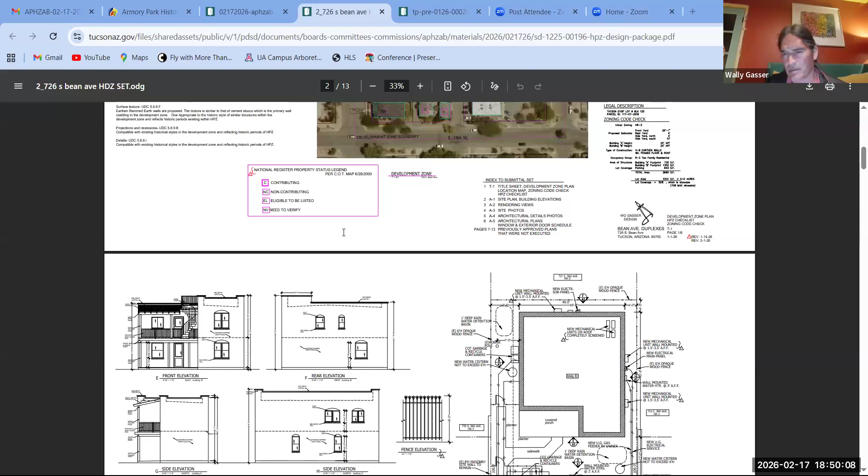Wait, am I able to control this also or no? Okay, no, never mind, that would just be me. I see this little tab. I apologize if I'm not sharing the right sheet. The second sheet, yeah, right there. That's okay. So that is essentially the overlay, the development zone overlay, and on the left margin is the HPZ checklist, and on the right is a code and site code checklist, summarizing coverage essentially and the building parameters.

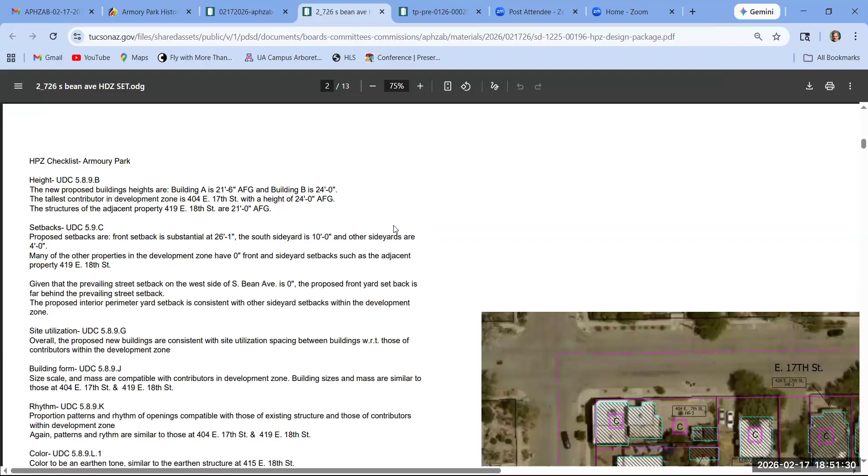So if you go to the checklist on the left margin, to the top— just a quick comment that eligible and non-verified, neither of those are contributing structures, they're too new. Yes, and it doesn't matter for this conversation, but you might want to change that when you adjust your plans. Oh wait, I'm sorry, which?

So if you pull up the image of the development zone, you have the third one down on South Third listed as eligible. It's not, it was built in the 90s. And the bottom one on Third is actually, I think, built in 2009. That one is non-contributing. Okay, what does NV mean?

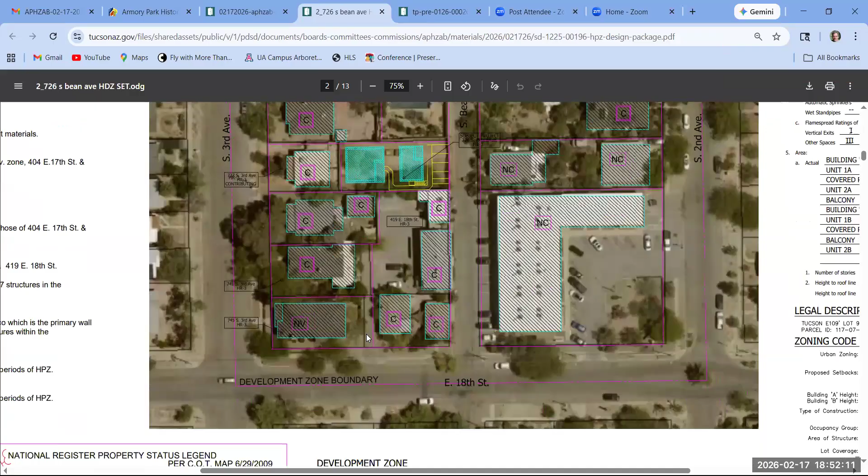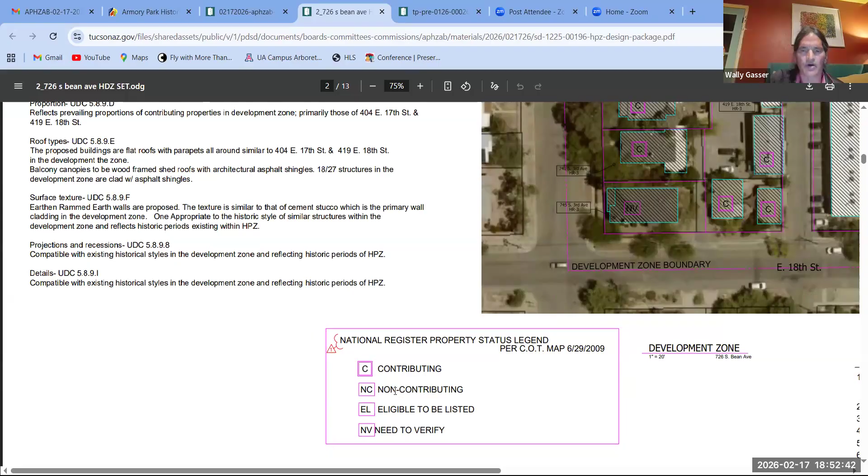Well, it says there's a legend. Your legend says need to verify, but it's non-contributing. Oh okay, I got this from— don't worry about it. Well, okay, so I got this information from a contributing map of the neighborhood. So you're saying there's an updated map. I'm just saying I know those two buildings and they're new. So if it says need to verify, it wasn't. Well, I didn't reference that building. Okay, yeah, sure, fine.

Okay, so as far as the height is concerned, at the top of the list is the height. So there are two contributing properties that justify the heights that we're using. They're 2-story.

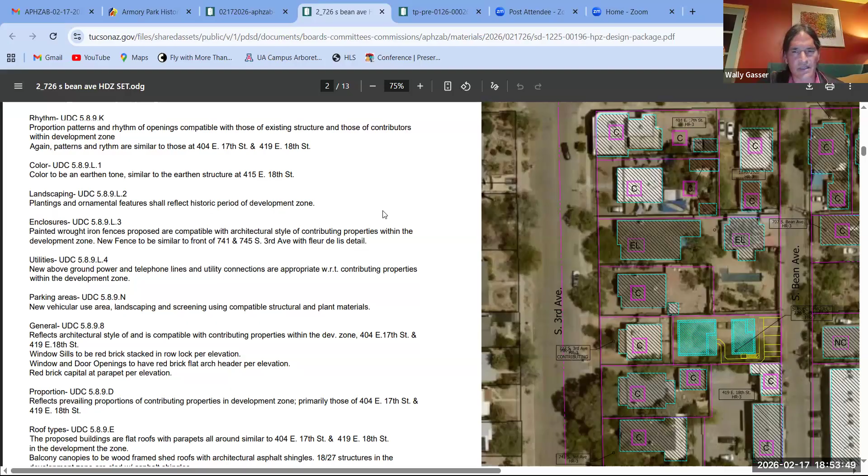So I guess we'll just go down the list as far as parameters go. I saw a comment earlier that we would be encroaching on the allowable setback, because we're asking for a 4 foot setback, but I'm a little unclear what the allowable setback is under the new middle housing code. Is that what's typically applicable here? Five feet? Okay, is it five feet, not four feet? But I thought it was four feet. So okay, we would like to request that.

But if you can show the standard setback is 6 feet or 2/3 height, yes. But if you can show that there are other buildings that have less setback, you can ask that the board waive those.

Well, that certainly is the case in this development zone. But we would be using the middle housing code, which doesn't take into consideration the vertical part of the old setbacks, I guess you'd call it. Is that correct? It still has to be compatible with the site utilization for the HPZ zone. Right, okay, but it's a factor we have to consider. There certainly are contributing properties that have setbacks less than — well, some are 0 — so there are setbacks less than the 5 foot standard.

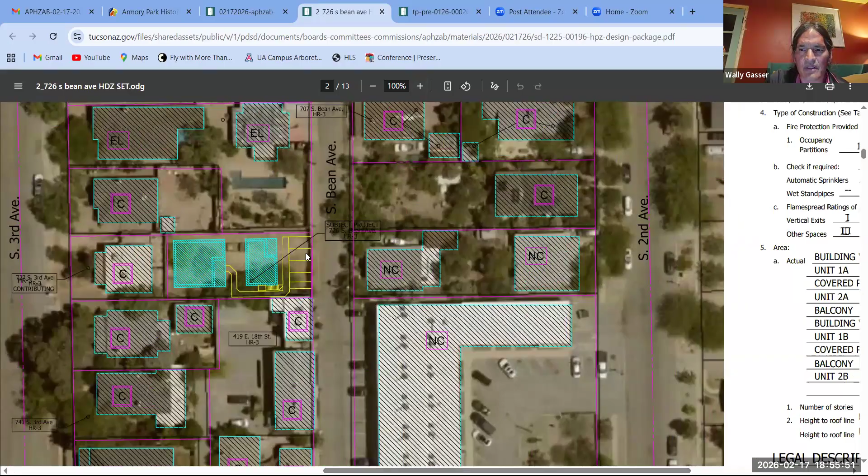So we're proposing a vehicular parking area in the front, one parking space per unit, and that actually provides a decent front setback on the site.

If we can go back to the list. The primary architectural details are compatible with certain contributing properties that are called out in the HPZ checklist, such as flat arches, brick sills at the windows, or excuse me, red brick sills and red brick flat arch.

I specified wood windows and doors. There is a red brick capital at the top of the walls, at the top of the parapets, that are compatible with the property to the south.

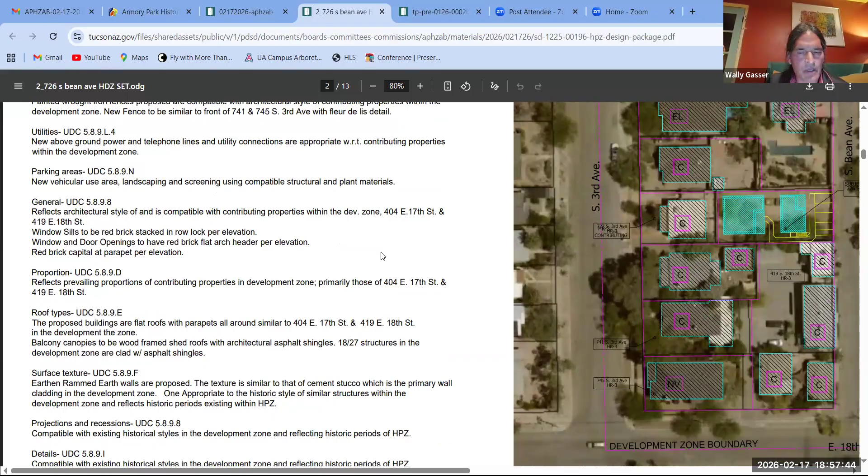Maybe we can go to the next sheet, the elevations. So these elevations are very much compatible with the property to the south, which is a contributing property. And then there's a two-story red brick building at the northeast side of the development zone, or the northeast corner, or northwest corner.

You think that those are your photos? Okay, yeah. Floor plans are farther down. I was looking for — I think those are the photos you're referencing for features within the development zone. Correct, yeah.

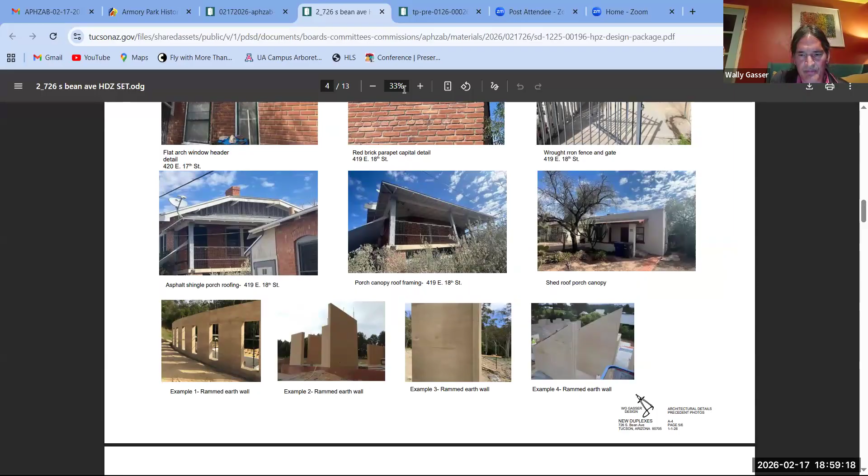And I guess one of — as far as building materials goes — we're proposing rammed earth, which I provided. If you go down one sheet — go up one sheet — yeah, right there. So at the bottom of the sheet I provide pictures of rammed earth, and I would argue that in a lot of ways rammed earth is almost indistinguishable from stucco, especially if it's done really monolithically, or in a smooth fashion.

But I think we may want to take into consideration also that, while there aren't many examples of rammed earth even in an expanded development zone, it's sustainable, and in general I think you could say it's almost indistinguishable from stucco. I don't know how you feel about that.

I think that will be up for discussion, but doing a good job of reviewing the plans, and the plans have been available to the board members, so there probably has been an opportunity to look at the plans.

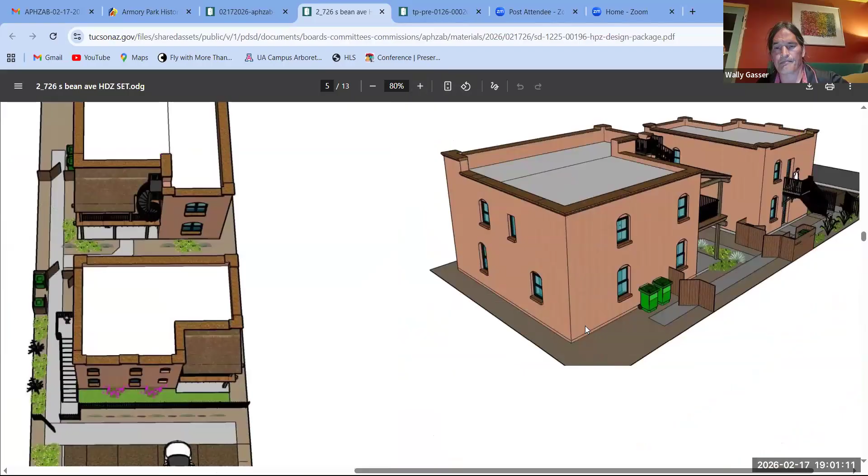And even thoughtfully to show the garbage enclosures. We may want to open it up to questions.

I'm curious, these plans down here, how do they relate? Oh, those are the previously approved plans. Okay, that's what I thought. They're labeled as such on the lower right, the header. Which, actually, technically they're not the approved plans. They were the submission plans, and they're what's available online.

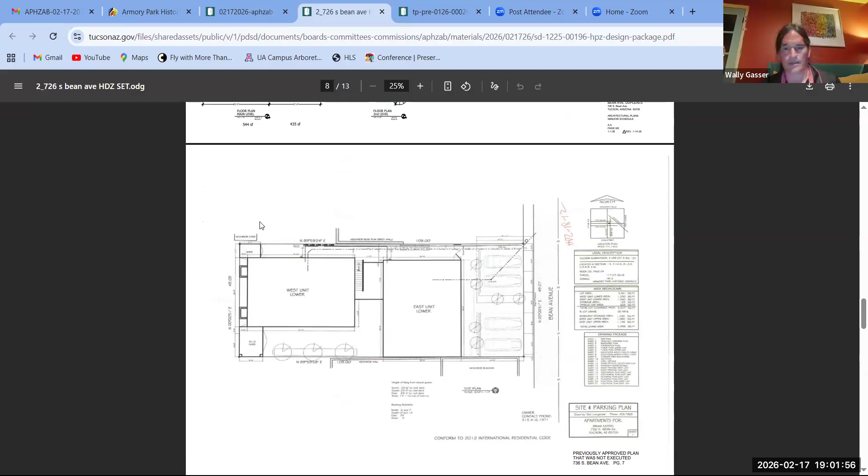But, for instance, the West Building had a required setback from the western property line of 7 feet in the approved plan, and there were no side-to-side slider windows, and no metal doors. So the actual approved plans, which don't show up online, are slightly modified from this. I looked up the old LARs from both Armory Park and Plans Review, and the approval letter from the planning director, so they're close. It does show, for instance, the front parking was approved and a 24-foot building and modified setbacks. But other than that, they're very different projects, except that they're two structures.

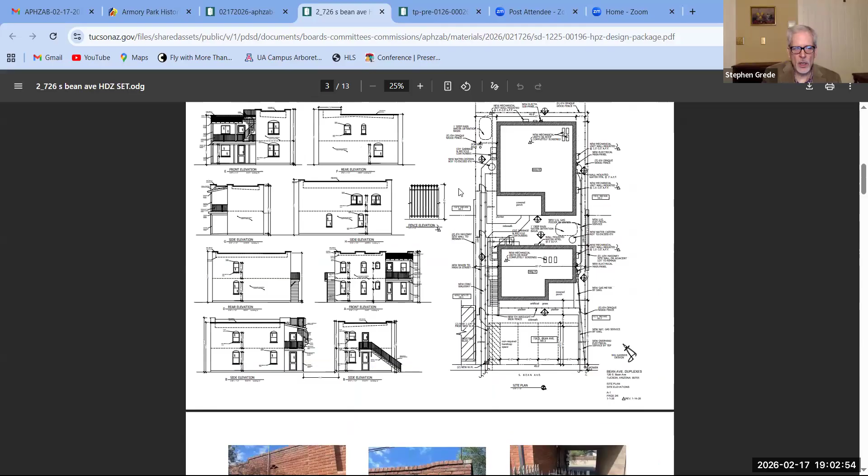So we're addressing this proposal here. Thank you. I'm going to stop sharing for a moment so I can see everybody. So if anybody was to raise their hand, are there questions from board members?

Maurice: Okay, I'll start. First of all, I am pleasantly surprised. After almost 8 years on the board, we have a staff report from the planning and development people, and I think it's very good. I was, again, very pleasantly surprised. It lays out the different issues that we're going against over here. And I appreciate that. I think this is very good.

I wish to see it in future projects. As far as this particular project here, I feel very concerned having to approve a plan which is not the approved plan, which is a previous iteration of that plan. So I don't know how far we want to go into this, since the plan that we're looking at is not actually the plan which was approved.

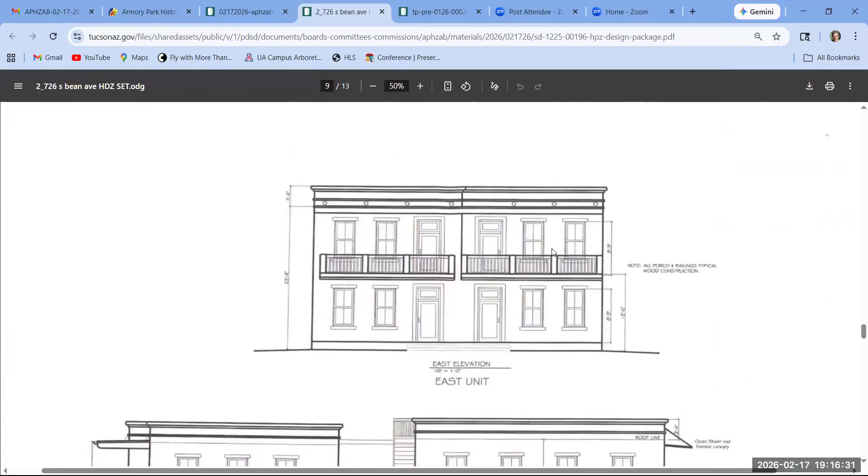I think that's for ease of construction. Well, there's no ease of construction there. I mean, go back down the sheet—Steve, go all the way down to the bottom. Keep going. All right, we're staying right there. So you've got 2/2—wait, but this is—no, no, that's not the project in question.

Sorry, that's the previously proposed project. I understand that, but I'm saying that you indicated to us that those window types were 2/2, and I'm asking you why did you go away from the 2/2? Because I wasn't involved in the previous project.

I think they're prone to malfunction. It has nothing to do with the width, it's just an expression of where that mullion is. Oh, I see, that's all it is. That's a minor issue, I don't know that anybody wants to address that or not.

You've got a 5 foot high wrought iron fence in the front. That should only be about 4 feet. Again, that's not a big item. Why was it 5 feet? For safety, I don't know, I mean, yeah, for safety.

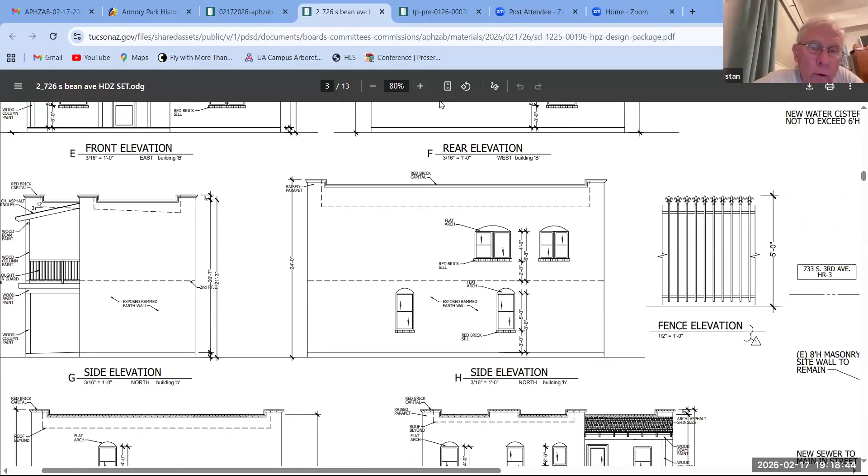On A2, your perspectives and roof plan show a deck going up for the back unit. You're going up on that roof deck, and you have to have a certain height guardrail along the edge, but you don't show that consistently over the entire roof, and you don't show any fence stopping people from going onto the entire roof. So my question is, are you going to have to change the parapet height in order to make your guardrails meet code requirements?

So what are you doing? Are you raising the height of the entire parapet around the entire roof? The parapet, no - there would be a fence in the interior portion of the roof that would basically divide the roof into a court.

You're not showing that for us, so I think that should be indicated. It's really not visible from the adjacent properties, but I can do that. If you're looking at the elevations and you're showing me a parapet, I can see a higher parapet - you would see the fence beyond that. So that means you've got to have a fence that goes along the width of it.

The roof deck would occupy a quarter of that roof area. So if you're looking at that elevation, you've got a short portion on the west side of that building that stops short of where that fence is going to go. So are you going to have to extend that all the way to the other wall that's on the south elevation? No, no, no - the roof deck would occupy a quarter of the roof area.

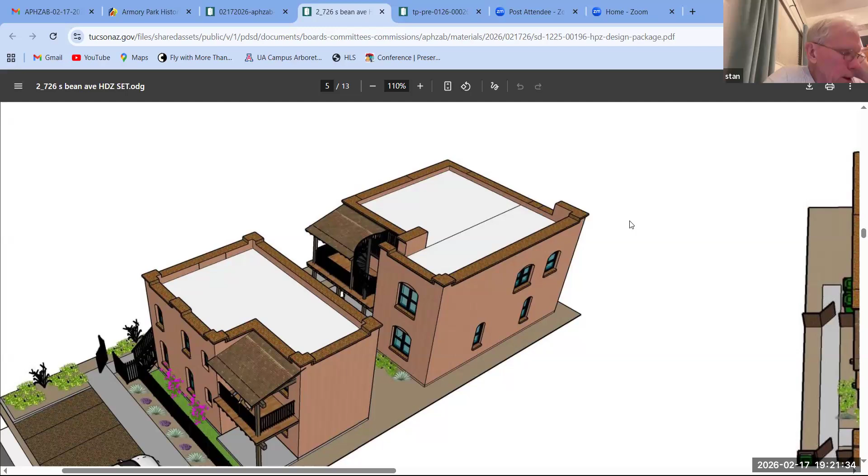So you're going to have a fence there that keeps people from going onto the roof - a rail, yes, correct. You would have something that would come in across here and then across here. And that height would meet the guardrail height for residential construction, which I think is 36 inches. Currently the parapet is like 3'6" above the roof height. All right, so that will be noted on there then.

I don't have any problems with the setbacks. I've already addressed the issue with the parking off the alley. And then there's an existing wood fence along the north property line that's in very poor condition. In fact, you've got things leaning against it to keep it up.

Is that coming down? I haven't really examined it. There's another corrugated metal roof or metal fence behind it. So that could be coordinated with the neighbor.

That wood fence could be removed hypothetically. It needs to be noted on the drawings then, because it's an ugly sight, and I'd rather see it removed because you've got a nice fence otherwise. It's actually the neighbor's fence, and he's got two fences, and the brick wall is the neighbor's too - that's technically on the neighbor's property. It used to be part of a building, I think, and it's just still there. But that is technically on the neighbor's property.

Can you do me a favor? Can you talk to your neighbor and see if they will allow you to take it down? Because with the existing fence, I think visually it would be nice to clean up that entire north elevation. Thank you, that's all I have.

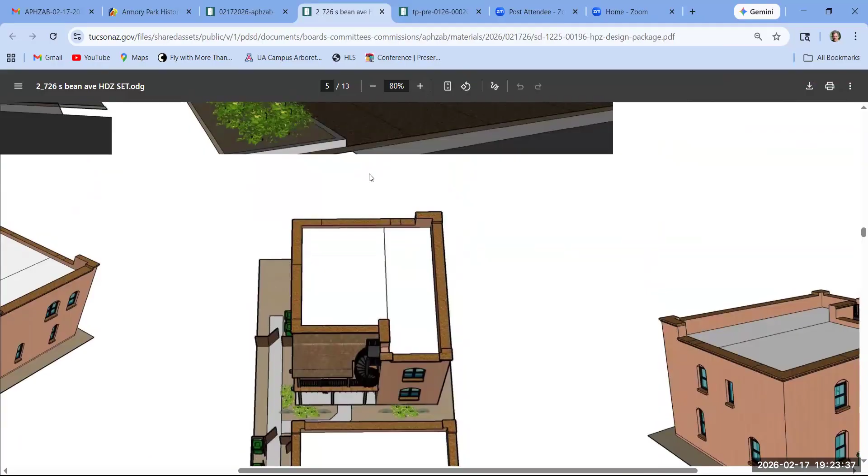I have a couple issues to talk about. One being the setbacks. I have no issues with the setbacks on the north and the south, but I want to talk about the setbacks on the west. I think 4 feet along that western property line is too close, especially for the neighbors, and I'm more or less advocating for those neighbors. In the direct vicinity, there is precedent both with the building directly to the south with the zero lot line and the 2 stories, the apartments farther south. But none of these have that condition with a lot that close and a building that close. At least it's 6 feet with the apartment complex farther down on Bean. So I'd like to see at least 6 feet on that western property line.

I agree, Matt, I just couldn't get my hand to come up. So you're talking about this small piece of this portion? Yeah, that's the west property line. I'd at least like to see that one at 6. I'm fine with the north being 4, and the south at 10 feet is all right too. Okay.

The other item I'd like to talk about is the landscaping requirements. I apologize, this middle housing is new to everybody and new to me, but I just want to run through the bullet items listed for the landscaping because I don't think you're giving yourself enough space for these items. One tree for every 1,000 square feet of gross floor area. Existing trees can count if they're not in the way of the building. You do have some existing trees on site. Maybe they can be worked around. Actually, I don't think so.

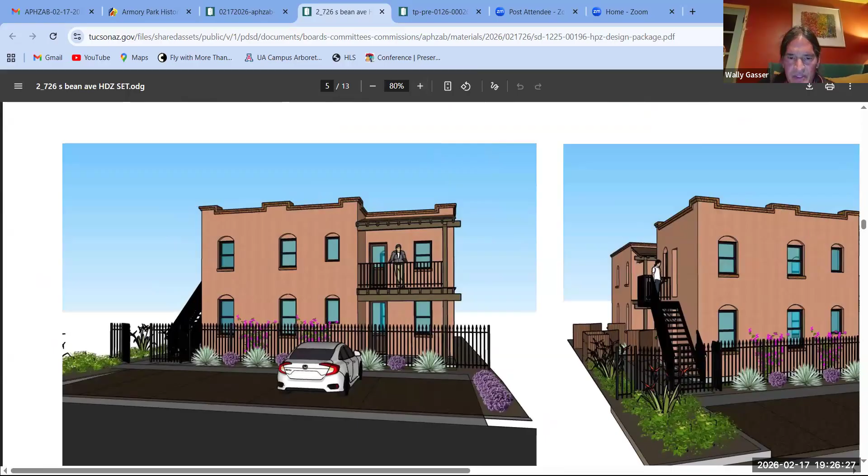I didn't provide a landscape plan, but I kind of fleshed out some landscaping in the rendering. I placed some plants, and there definitely are some areas that can be used for planter areas.

Is it possible to move that building on the west end another 2 feet away from the property line so that they can get to 6 feet? On the west, yes. All right, so we'll make that part of the condition then.

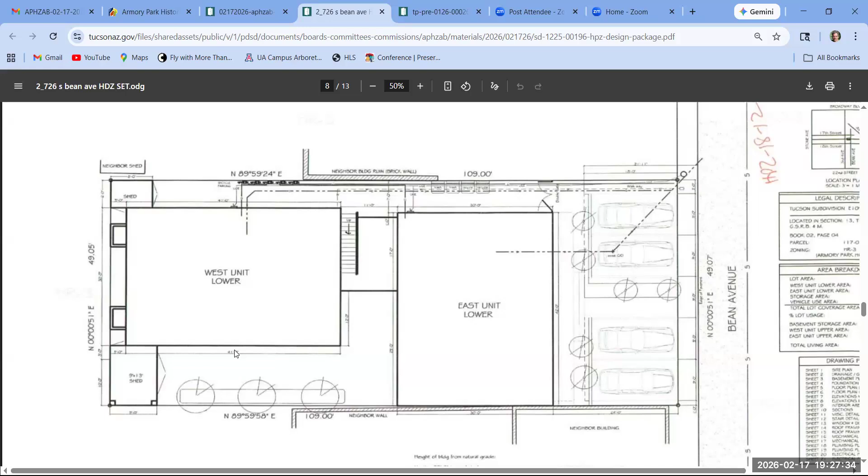I agree, though, that a new 24-foot high wall, 4 feet from a property line, looking down into your yard for the neighbor to the west, is a little bit invasive. So I would advocate for pushing that building into the lot as much as possible. Especially since, Wally, when you were asked, you just went like, oh yeah, that's fine, so it seems like that would be easily done. The 6 foot setback.

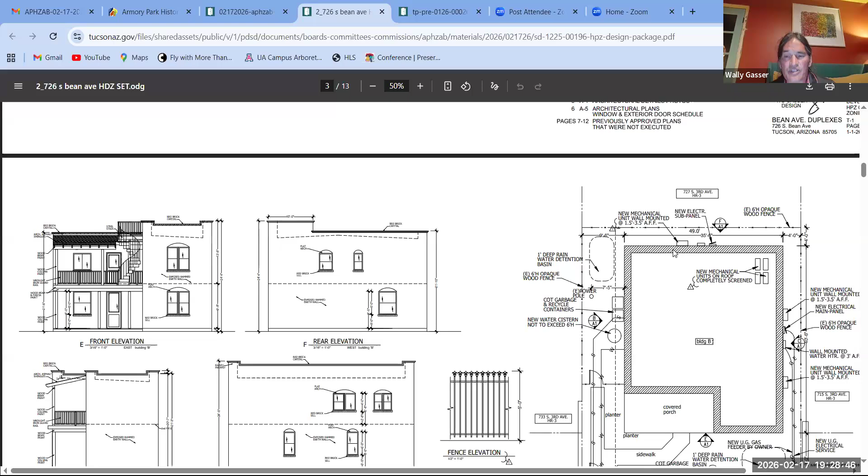6 or 7, or however much you can shrink the yard between your two duplexes to 6 foot would accommodate, and that would be helpful in a revised set of plans. Yeah, 6 foot sounds good to me.

Has the city issued a variance yet? It's not required technically if we approve it as allowable, because of the evident setbacks within the development zone. Okay.

So for instance, I had to print them so I could see them. I was looking at your floor plans and then trying to relate them to your elevations, and they don't line up. So if we can go back to the development package on page... Oh, I know what you're talking about. Yeah, but okay, so there was a revision. There was a floor plan revision, but it doesn't affect the footprint, or the rear unit you're talking about.

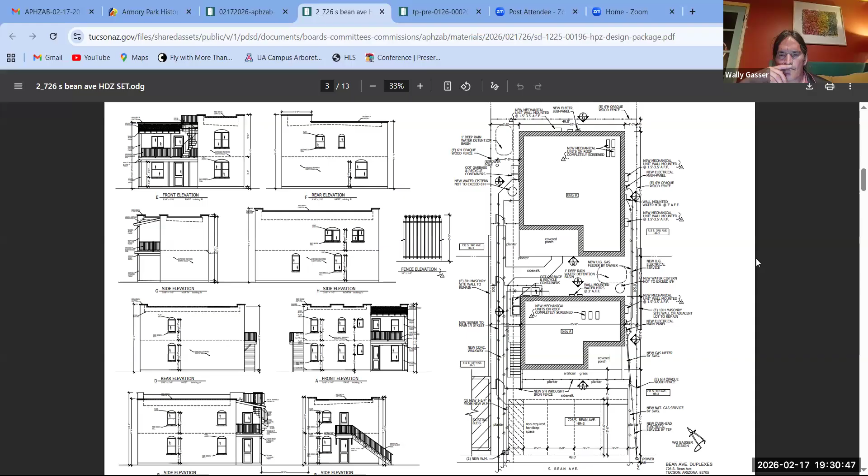So on that one, you're still showing a sliding window or a double casement on the second floor, on the balcony. And that needs to be fixed because sliders are prohibited. Could that be... that's an error.

Yeah, that's an error. And you're also showing on the first floor on your plans that there is a window in your staircase at some unspecified height that's narrow, right up against the wall, which is not in that elevation.

You get the floor plan. Yeah, it's impossible to see them side by side unless you print them out. Okay, and there's problems with every single one of them, except one. No, two of them are okay.

So it's this one here you're talking about. Yeah, there's a little window there. That's 10. Okay, and the numbers on the plans do not align with the window schedules.

They're different. So for instance, while we're looking at this, on the kitchen, dining, living room floor plan of building B, you show a door and two windows, but your floor plan shows two windows in entirely different areas that align with the second story.

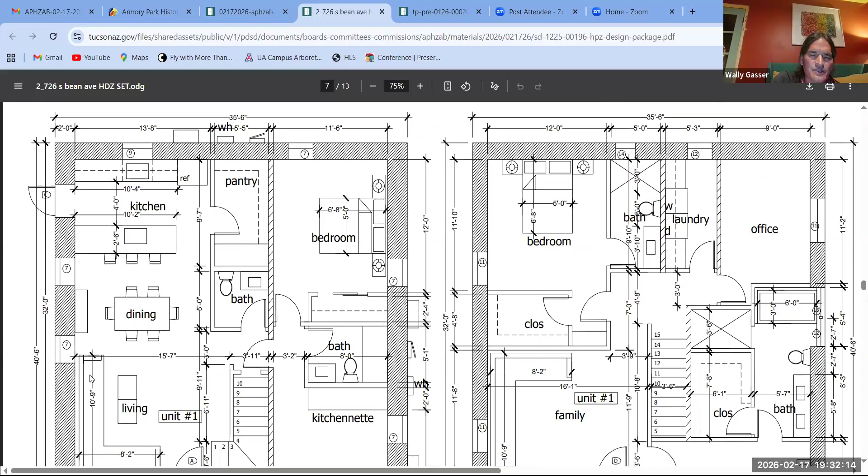Okay, yes, that is there was a revision, like an indeterminate revision. Since these are preliminary plans, it didn't... so we've got to see a set that match. Okay, so on the second elevation at the top, the back actually has two windows on the first floor and two windows on the second floor,

but the kitchen window is shorter than you've got it shown drawn. And then on the elevation that shows the side elevation of building B, which is the next one, there's no windows on any of those walls, and I understand because you've got beds up against them, and they'd have to be clerestory, which we don't like.

But we don't usually approve blank walls anywhere, just as a comment. And then the next one over, it shows a double hung next to a fixed, but we don't use that. They either should be both double hung or both casement. And to Stan's comment,

I remember looking at this development zone. There are double hung, there are single panel or multi-paned, there are casements in the development zone. So, and there are examples of mixed, so you can use those different forms, but if you've got a series of windows, both windows ought to match.

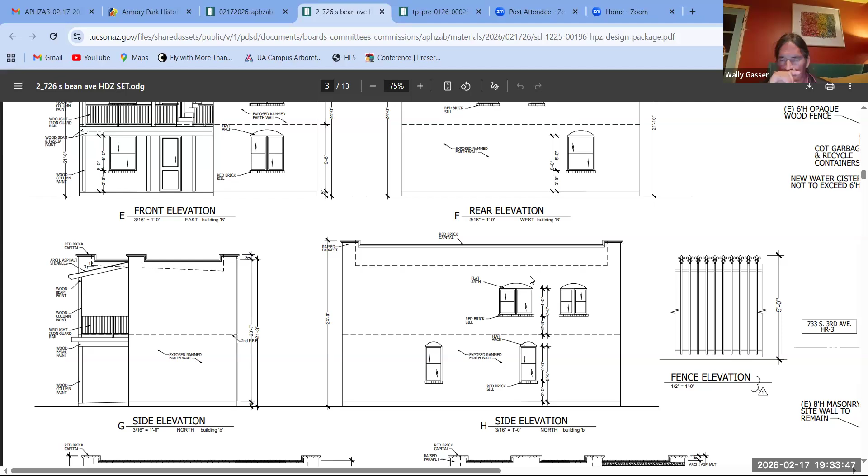Okay, so you might want to do two casements there because one's over the tub and one is openable. But that would mean that the window next to it on the second floor, probably in the bedroom or the office, probably ought to have two casements too, so that you retain a rhythm on your plan.

Yeah, okay. And then the next set of images down, you're not showing the parapets that would stick up.

The back is about right, looks like the two windows. And on the front, your renderings show the same size windows there in the bathrooms, but they're different sizes on the plans. That needs to be adjusted. Then in the bottom, see, they're the same there.

Sorry about all this. And then on the bottom set of drawings, again, sidewall, door and two windows, different locations. The other thing they don't show is...

I would really encourage you not to put integral drains inside rammed earth. You will always have water problems. You would be better off doing scuppers and external downspouts for long-term viability of your building, but those should be shown. I would agree with that, John.

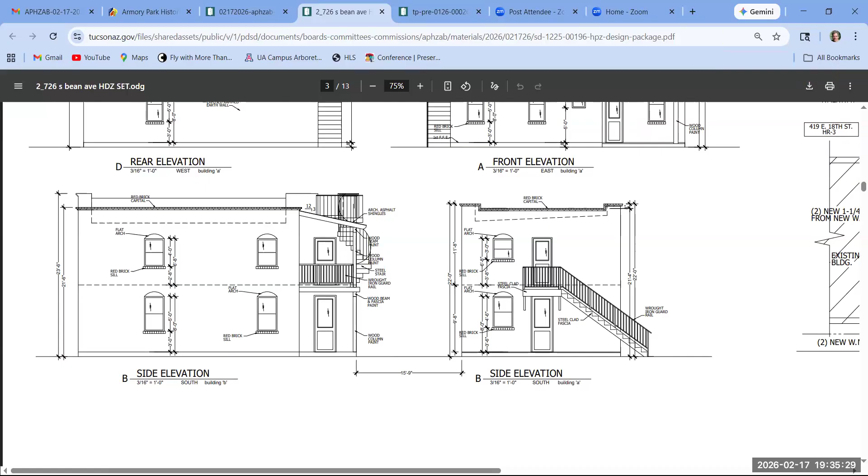So just a comment, and then on the site plan itself, a little over to the right, you've got several different locations for your trash, but I don't think you really want to have the trash cans right underneath your kitchen window that opens. So you might want to look at that.

The power pole you're showing on your plans is not actually where it is on the lot. And that's a weird one because that was supposedly not our purview, but was brought up the last time we looked at this whole project. There's a telephone pole, and 7 years ago it fed 3 houses. Now it looks like it's just feeding your house, and a new pole went up on the property to the south that is now feeding those other homes.

But you do have a sewer right down the middle of the lot that feeds the property to the west that will have to be addressed. And you legally have a 10-foot easement all the way along the south side, and building A conforms, but building B is 6 inches into it currently. I hope that flies. I don't know, that's when you get to the inspectors.

But little tweaks, and then you ought to show how the cisterns catch into your runoff so that you can show what size drainage basins you actually need on site. And I'm really glad Matt brought up the landscaping, that you have to have bushes if you can't do trees and that sort of thing. But it means since we're using that, we should see that on your plans.

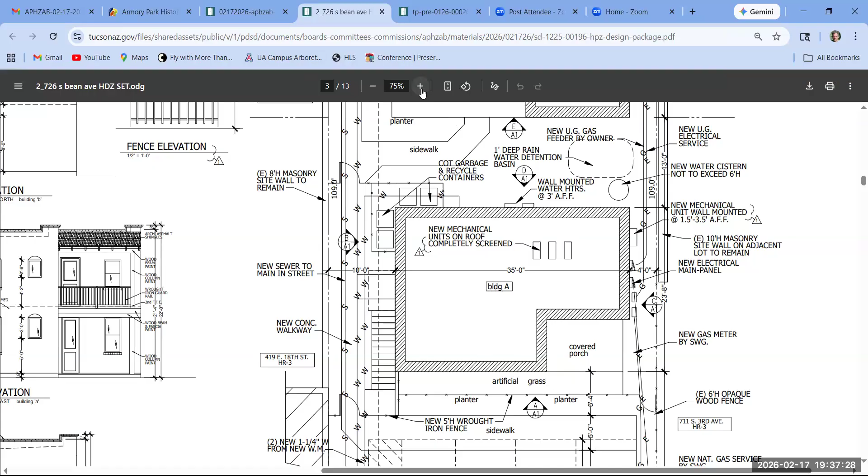And I will say that Steve helped me out here. The Historic Landscape Subcommittee was reviewing artificial turf and found that it's not appropriate generally because it's toxic and it's just not a great thing. So you might look at other treatments there.

I'd be uncomfortable approving that. I'm okay with the parking the way it is, although the access space probably ought to be concrete, has the path in to your front doors, rather than asphalt that's marked.

And the front fence, you've shown it at 5. Technically, it can be 6 feet in front if it's all open, which you may need for security at this property. And you might want to put any other fencing you might want to put up on a plan.

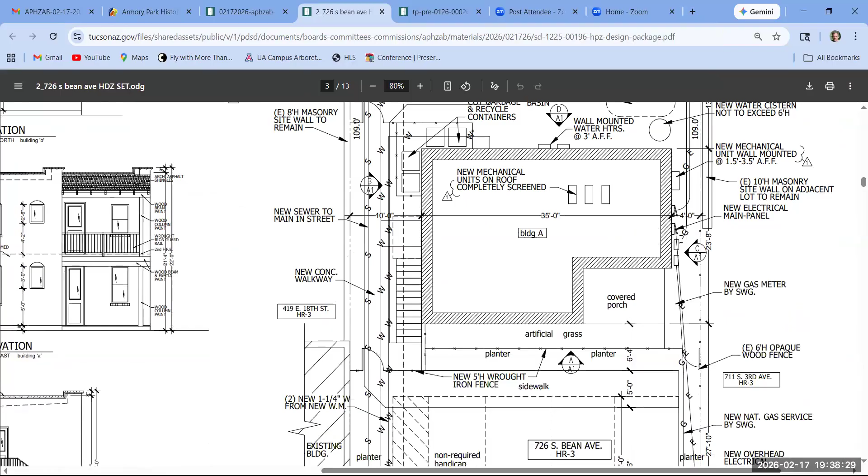We also don't have any light fixtures shown, and would need those. The light fixtures would be in the plan, or any in exterior elevation? Just show us a picture of the type you're doing, to see if they're historically compatible. You may only have one on each porch, and it's just like a globe, I don't know, but we're not seeing any of that.

Like Matt said, I'm okay with a 4-foot on the north because it's up against yards, and I'm okay with the setbacks if they meet the easement on the south. But I encourage you to move your building forward.

On the question of rammed earth, I know that it was talked about when I was only a citizen advisor before. Actually, I don't mind it as a form for infill in Armory Park generally, if it's done properly and the rest of the building form is historically compatible. I have some reservations possibly on a vacant lot with it being a primary residence, but that would be specific to site.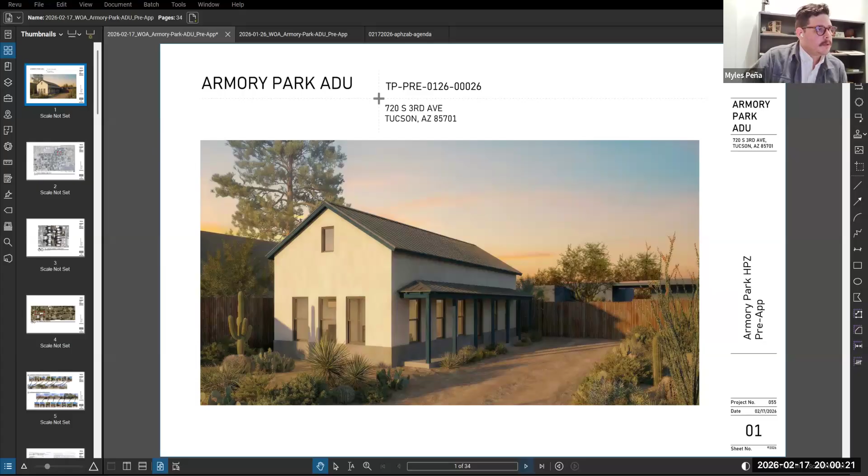Within the development zone, you can see where we are in the southeast portion of the neighborhood. There's a lot of contributing properties along the street here. So here is 720 with access off of Railroad. You can see a little bit old in terms of the status of the property. There has been a lot of work happening, but here is kind of the latest from Pima County.

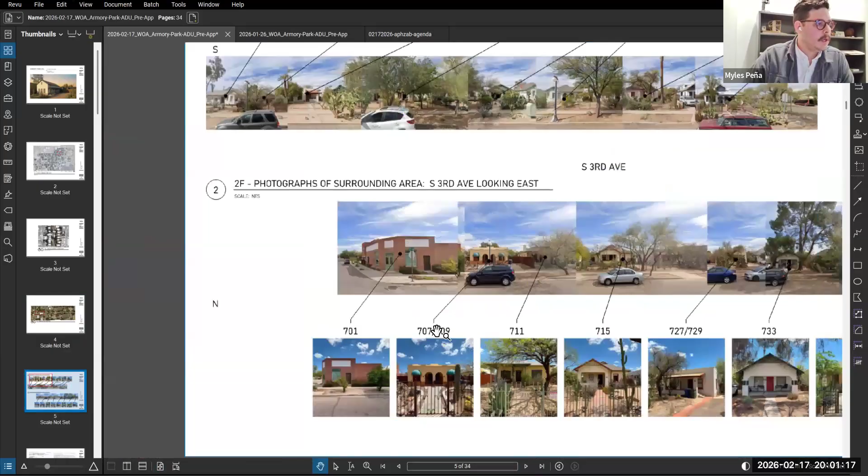And have also spent some time diving into those existing homes within the development zone. Last time I was with you was looking at the garage for Jake here on the corner at 702. The character of the street here is largely gable, hip, mixed roofs, Queen Anne style, with the occasional flat roof structures. The grocery on the corner, which was originally a design inspiration, but that has since shifted.

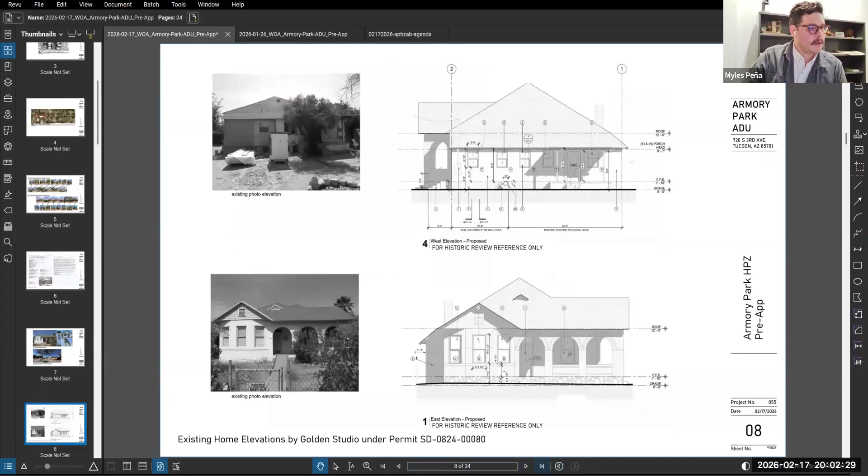Starting to look at the design again, looking at the height - I think the height and the type of structure, the roof form, was a really large component of the previous review comments. So the starting point for this proposal was looking at the gable here on the north side of the home, and the roof form is matching the pitch of this roof. We're trying to keep it around the ridge height of 18'6", but the maximum height of the house is 22'9" on the existing home.

So this was the previous design that was presented in July of 2025, and for multiple reasons there were concerns with this. Looking at the meeting notes from that meeting, the secondary structure shouldn't be taller in height than the main structure, which was not an issue before. But I think considering just the flat roof versus the gable roof structure, there was a stature sort of difference that was occurring.

And there was some discussion about measuring roof heights, and some discussion about using a standing seam metal roof on the porch. That's going to be a main issue I'd like to look at with everybody here today, because we still are proposing a standing seam roof for several reasons.

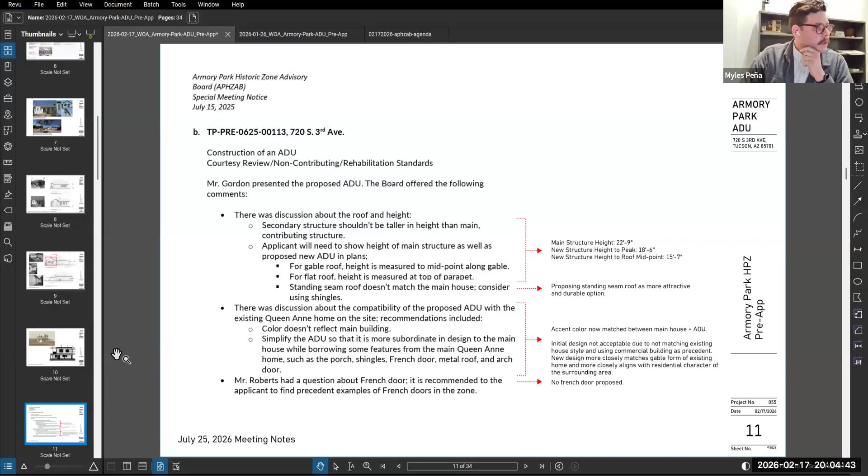The accent color was different from the main house. That's been resolved, and we have a new accent color proposed for both the existing home and the ADU. There were also comments to simplify the ADU so it's more subordinate in design to the main house while borrowing some features from the main Queen Anne home, such as the porch shingles, French door, metal roof, and arch door. I think some of those were negatives, but I feel like we're largely achieving that. There were also issues with the French door in the original design, and we currently have no French doors proposed in this design.

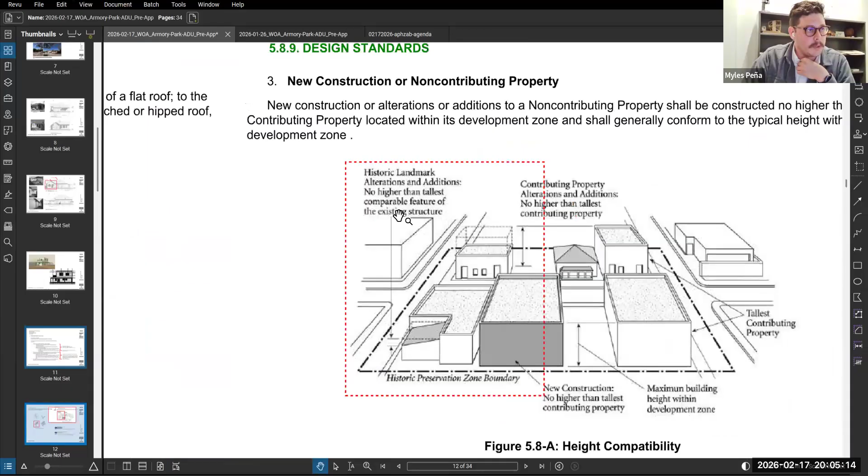There was some back and forth at the last meeting on the height. This is from the UDC design standards 5.8.9. There are other ways of measuring, but they're largely not relevant because the main target here is to have alterations or additions be no higher than the tallest comparable feature of the existing structure, which we are in compliance with.

There was also some discussion on the height of the casitas. Originally, guidance from the City of Tucson in 2022 was 12 feet or the same height as the primary structure, whichever is greater. That was revised and simplified in 2024 to be the max height of a single family dwelling within the same zone, which is generally 25 feet. But again, we are keeping the addition, the detached ADU, shorter than the main house.

I also wanted to highlight some of the guidelines here in terms of keeping additions simple and appropriate in size, shape, material, color, and detail. I believe we're meeting all of those requirements. There are some slight departures, but new construction does not need to copy the existing structure and should be compatible with surrounding historic buildings and streetscapes. So we've paid very close attention to make sure we're meeting those requirements in terms of fitting in with the surrounding neighborhood, keeping the changes from the street side visible to a minimum, and keeping all of the materials appropriate to the building and the neighborhood.

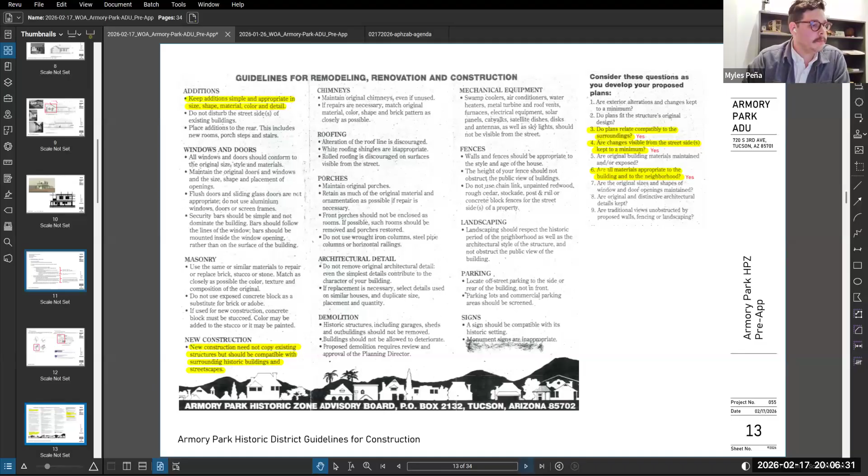This is the official form, but that's largely just reiterating what we've discussed.

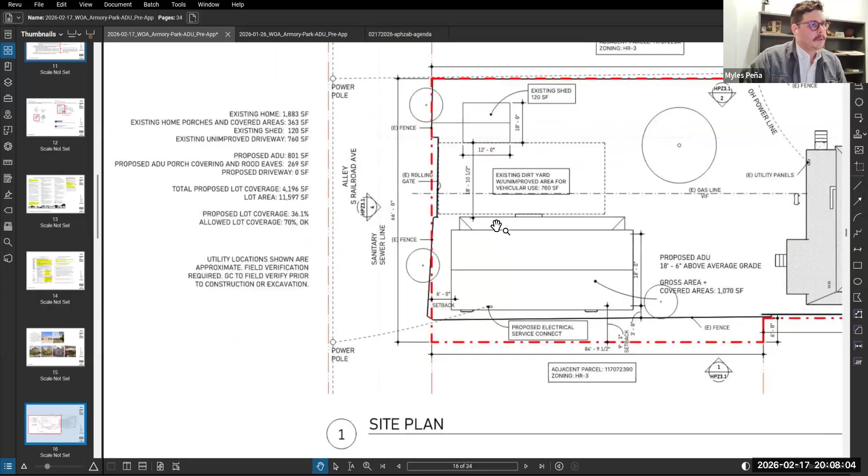Looking at the site, we have South 3rd on the east side of the site, with the main house here. There's a little bit of a dogleg in the property line, so we are maintaining a 9-foot setback from the south side and a 6-foot setback on the west side. All of the fence and gate are existing here. No issues in terms of lot coverage, including the parking area off of South Railroad and any porches and coverings. We're at 36% lot coverage; we're allowed 70.

In terms of utilities, we are planning at the moment to tap off of the power pole in the alley here to have a separate meter. You'll see more elevations with utilities, but basically the main strategy is to conceal and hide all of the utilities. So condensers, water heater, the electrical connection, venting for dryer, everything is geared towards this south facade here by the existing fence.

Because the overall massing, shape, and size of that previous structure was a concern, the starting point for this design was looking at what the overall massing felt like. I spent some time on site sketching, taking stock of the surrounding buildings, trees, landscape, and things like that. The scale was starting to feel very comfortable in terms of tucking into and nestling into the neighborhood here.

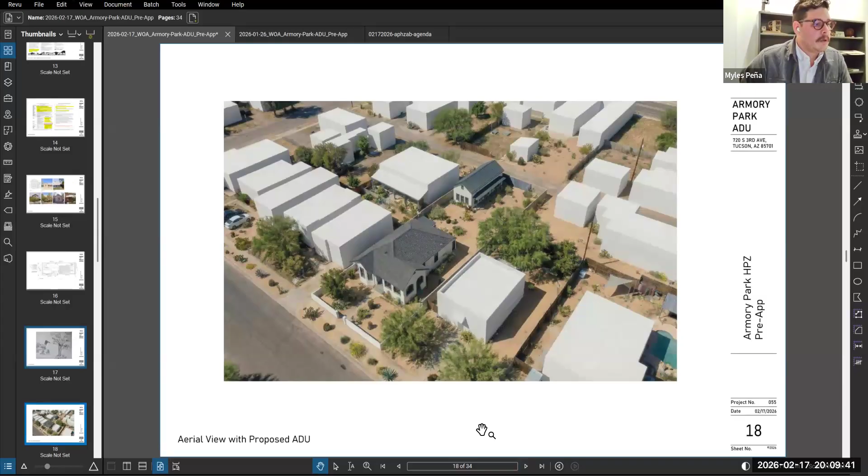I also took time to do other elevations to show the relationship to the existing home and especially the alley. Starting on the south side, that dashed line is where the existing fence currently lies, and you can see these utilities are concealed. The shower window is something I'd like to discuss in more detail later, but that's a concealed element behind that fence on an adjacent property. So that fence will be there, but even if it went away at some point, it's not really visible from the street or the alley.

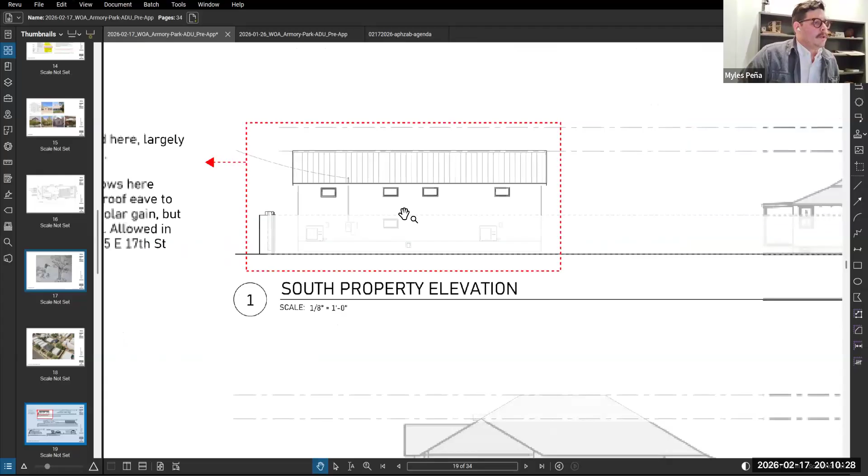Also on the south side, I am showing picture windows that are rectangular in shape. Some of that draws from the ADU built just to the north, but that window type felt appropriate on the south side because we needed to get light into that space. These could also be tucked up high enough on that eave so it protects from direct solar gain in the summer, but allows solar gain in the winter. So those have been sized and located to work with sustainable design practices.

But the window in the shower is a little bit up in the air. We were also planning a casement window here that matches the proportion of those rectangular windows, since it is in the shower.

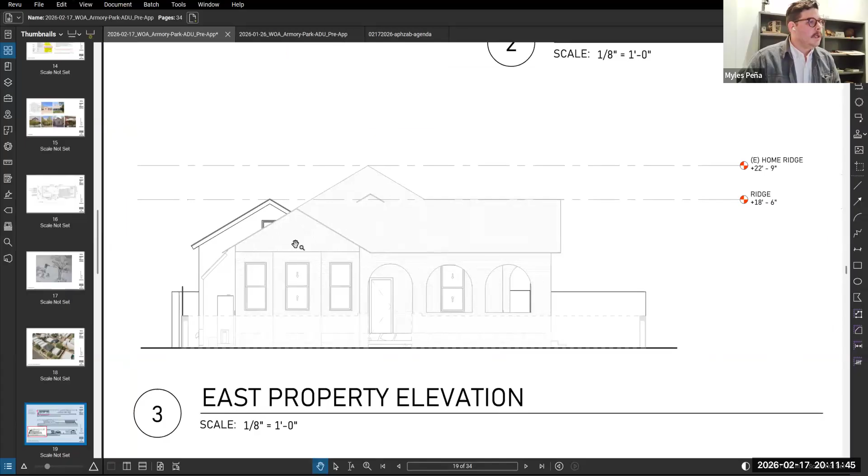From the east property elevation, you can get a sense of the scale of the ADU with the existing home. From the street side, you can get a sense of the additional height of the proposed structure in relation to the main home. And it tucks away pretty nicely behind that main house.

I would almost consider this more of the street view of the house from the alley, because this is where it interfaces with the additional structures and is closer to the alley. So I drew the ADU that was just finished to the north, and this is a contributing existing structure here. Overall, you can see the height is characteristic, and the setback is characteristic with what's existing.

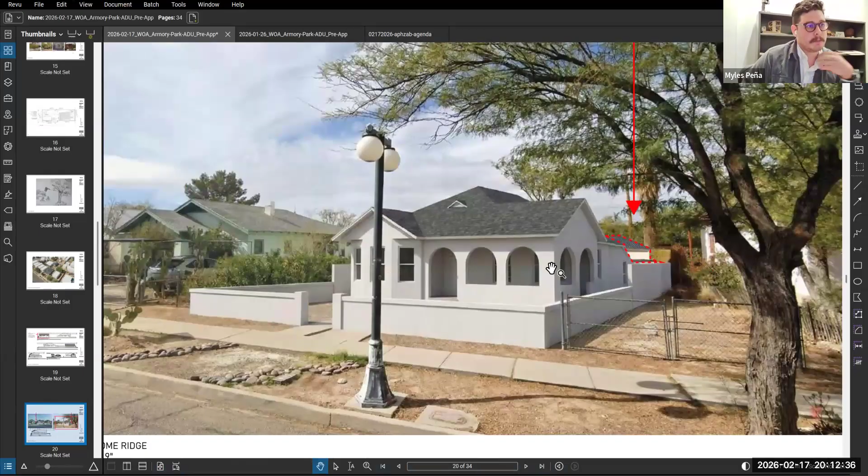From the street, because I know last time that was a major concern, since it's so far set back, you really get very minimal sightlines of the ADU from 3rd Avenue. These are accurate from our model, just with context added in. But if you're in front of the house, you're really not going to see the ADU in the back.

If you move south a little bit, this is about as much of the ADU as you would see. And if you move north a little bit, you would see that back there. But I think you'd be hard pressed once landscaping and things like that come in.

From the alley, you can see the height of the existing fence and get a sense of the proportions. It is a little bit taller.

I think one of the things with this ADU is that we're using a code path to have a mezzanine within the structure, to capture a little additional square footage. So we have vaulted ceilings inside that space and an office space up on the mezzanine. The mezzanine does not count as a level with this code path; it's a 1-story building because it's under 200 square feet, and there's not a restroom or anything like that up there. So it's kind of bonus square footage.

We can make use of that vaulted space, and it also allows us to use a non-traditional stair. So we don't have to meet the stair code, but we have to meet code for something like a ship's ladder.

So all those have been met. But you can see the proportions are still within the characteristic of the neighborhood with this structure, and some of those other ones from the precedent.

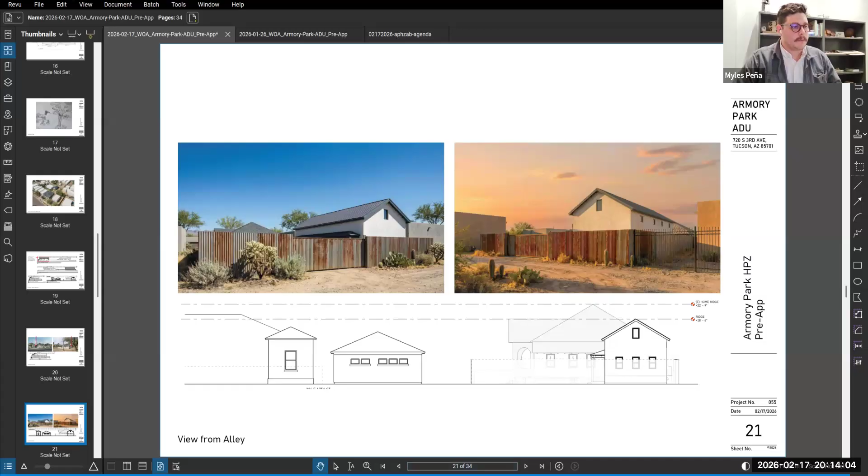So leaving the main house, this is the view out to the ADU. Very simple gable form, uses columns here to set up a grid that all of the windows are centered within. So the two gable ends have a set of three windows and then one high window

for the mezzanine to allow some light in. Right now the plan is we have fascia boards on the upper portion of the roof with an overhang that projects similar to other structures. It's a smooth white stucco and Ardex product, and then a transition.

The height of this line here is meant to mimic the base that a lot of the other buildings have, and mimic the base that the existing home does have. Different materials for that, but still using that line to add some interest to the facade, to break it up a little and reference the surrounding architecture. It would be a transition to another type of stucco here.

And I'm just not a fan of the stucco sitting out proud of the foundation. So the detail here would be to have a flush alignment of the exposed concrete slab with the face of the stucco wall. So careful attention paid there.

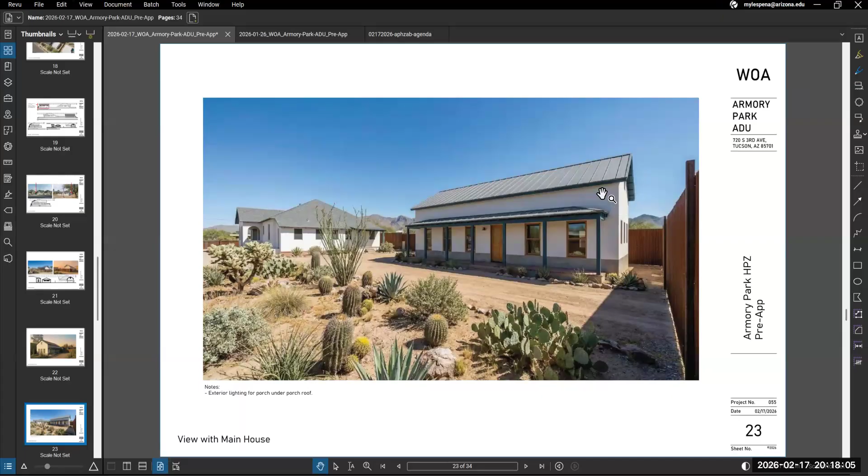You could spray it with foam insulation, but Sophia is very conscientious in wanting to do the most ethical approach here, so we are sticking with mineral wool. We're going above code for the R values within this roof assembly, then having a vented portion on top of that. That's a small vented area that makes the vaulted area work well, and you don't have to deal with future issues, because if any water does make its way in, there's a place for it to dry out before it soaks into the main assembly of the roof.

You cannot see these windows on the west side with the fence very well, but these are a little bit smaller windows, so it's pretty much the same window type along the north and the east side of the house. These are double hung, and they do meet egress requirements as well, secondary egress.

The smaller ones are on this side, largely because this is the sleeping area, the bedroom area. So that would allow us to have more furniture or a bed against this wall here.

Elevations - you can kind of get a sense of the rhythm and the scale of the structure, and some more detail of the mechanical and electrical systems that are proposed.

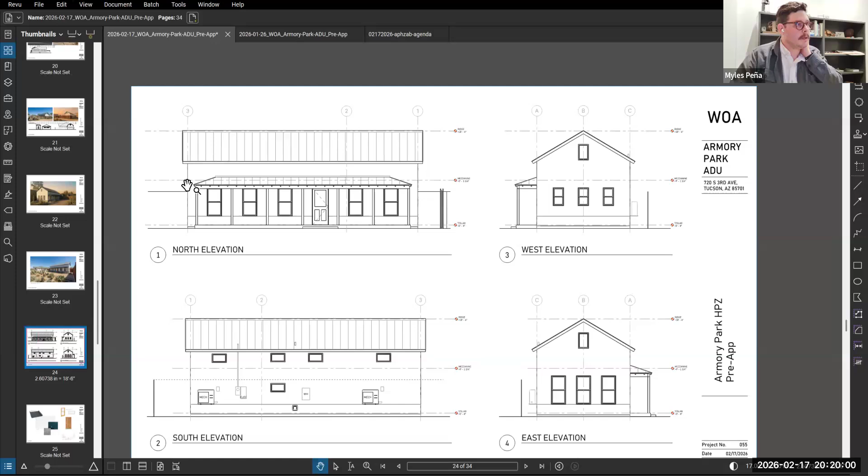In terms of window types, it's the double hung - the same type along this side and the north side. A little bit smaller picture window above that space, and then these rectangular windows. These are planned to be picture windows, and this is kind of the question mark of what we can do here.

We have engaged a structural engineer on this. We are technically in SD - the city got back to us today and said it looks like it's ready to go in for permit. But we aren't taking action yet, and we're still kind of going to be adjusting things - this might shift down or get a little bit smaller. We do have a large ridge beam that has to transfer around that window, so that's something that might change slightly as we move forward.

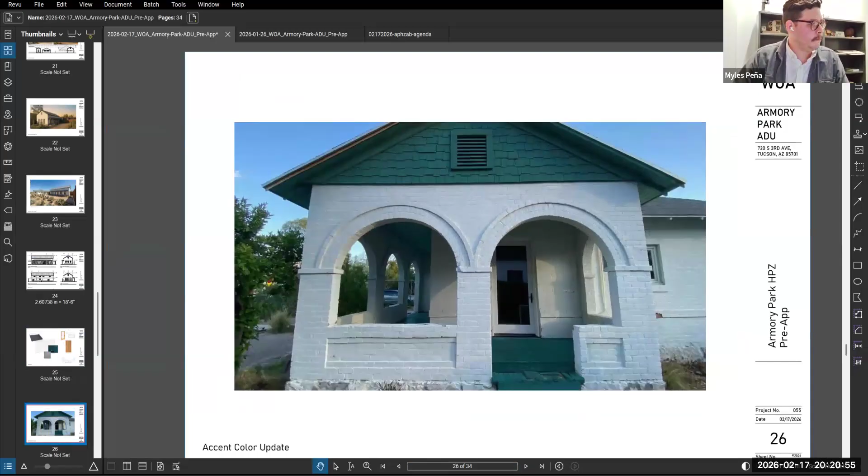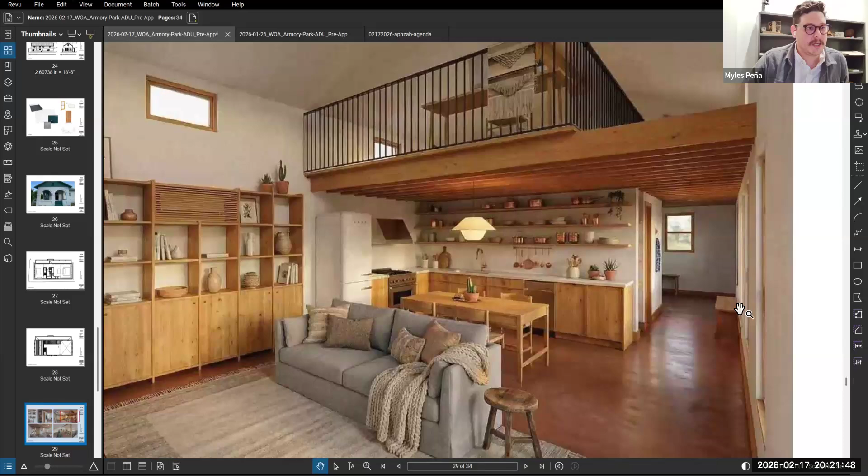You land on a place to put your shoes and coats, things like that. Kitchen is tucked under that mezzanine level. It's a little tight up there, but it's going to be cozy. From the mezzanine, you can get a sense of scale here, and then this is the bedroom area. You go around the corner and there's that ship's ladder up that way.

So that's largely my presentation here. I know this is our courtesy review - we're very ready to get moving and are hoping to be with you here next month for action.

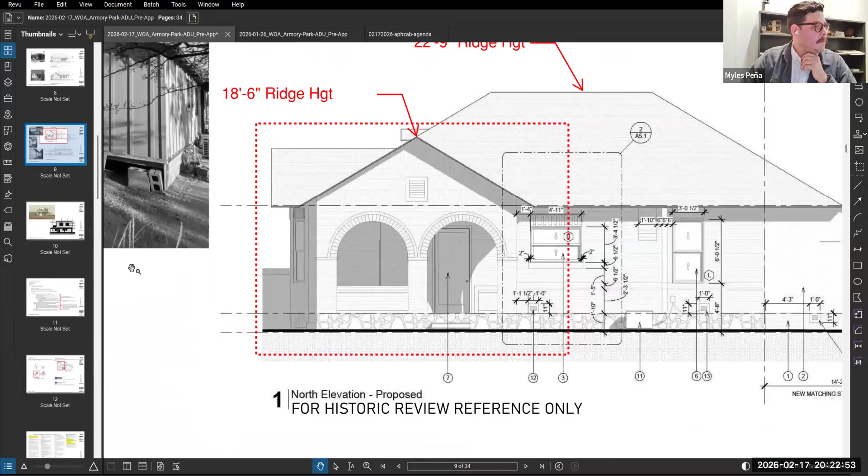I want to make sure the stylistic approach is feeling right. We'd really like to keep the structure here at this 18'6" to match this - we're trying initially to match the proportions completely, but with the constraints it was challenging. That's kind of the target, but we'd also like to keep the mezzanine usable.

If you look at the section here, this is the height of 6 foot, so in this zone most people would not bump their head. In this zone, this is 6'8", so that's code, and 7 foot is sort of the ideal. So tight space, but again, for a mezzanine it's appropriate. I think trying to manage the vented layers and do all that, we might need just a little bit more space to work there.

So, building height, the windows—especially the rectangular ones, I know that's a sensitive subject—the window type in the shower, the stucco decisions that were made, the accent color, and the roof material. And I see Lynn, you have your hand up.

I just wanted to say I really appreciate the way you listened to what we had to say last time, because it seems like you heard us well and addressed all of our issues. And I'm a block away, so yay, I like it. But I don't know anything about structure or building materials, so I can't speak to that. But it looks pretty. Thank you, I appreciate it. Yeah, that was the goal.

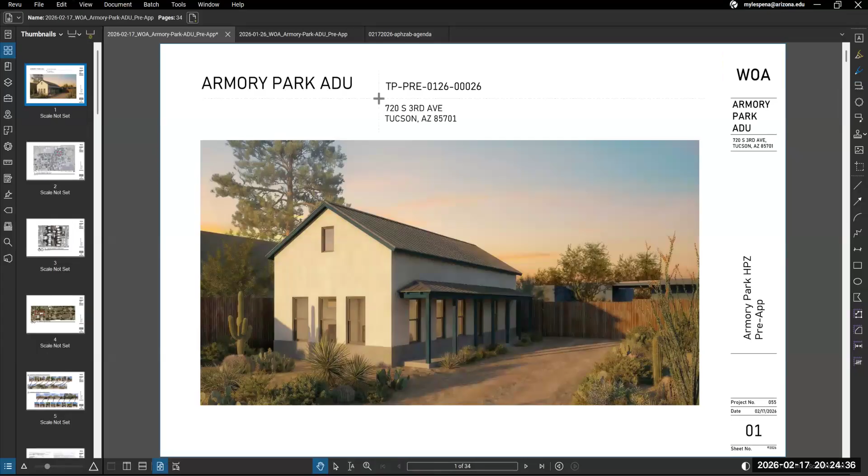Yes, Maurice. So like Lynn said, I really appreciate the change in the design. It looks much better than the idea you had last time. So I think you're moving ahead here. This is very good. Now I have a couple of questions.

What is the height? Is that 18.6 or 22.9? It's 18.6 right now. As we work with structural, I could bump up just a couple inches, but the ultimate goal is to keep it under the main ridge of the house, which is 22.9. Okay, so that is good.

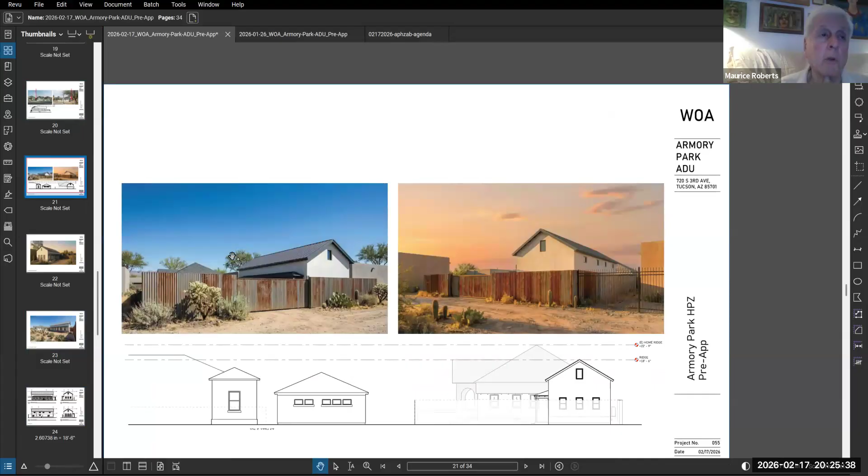So I do have a couple of issues with the mezzanine level windows. The one on the east side and the west side is a clear window, and both are visible—the one on the east side less than the one on the Railroad Avenue side. Nevertheless, you're using a clear window, whereas it would probably be more logical to find the same kind of dormer window you have in the main house, which is basically slats of wood, just to match the existing style. That's valid for both, the east and west side, since they're both visible, the east side being less visible than the west.

The other issue I have is the windows that face the neighbor on the south side. Those are basically clerestory windows. Now, I haven't seen any clerestory windows in Armory Park, so it's not really within the spirit of the neighborhood here. If you were to go from 18.6 to 22.8 or so, you may have enough space to put in double-hung windows, which would look more like regular windows rather than clerestory windows. So that would be my recommendation.

As far as the shower window, it's not really going to be visible—it's behind the wall—so I don't think that's really that important. Whatever works for you, I don't see an issue with that.

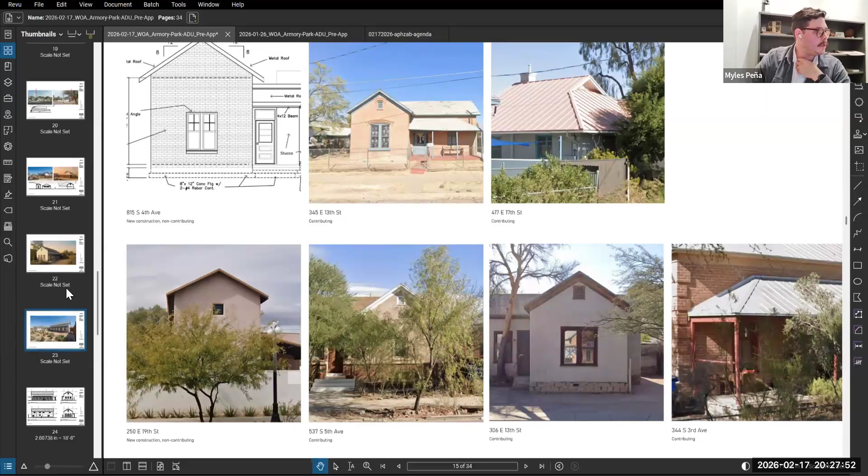The clerestories, I realized that was going to be a challenge here. I'm hesitant to change the window type because a different type of window would allow more sun in on that southern exposure. So I think at that point it's a question of what's more important—the sustainability and cooling load of the house, or the aesthetic? Because right now the priority has been that on this southern side we're going to be getting a lot of sun, and it's not super visible from anywhere other than this one angle on the alley.

I'm curious how—I'm honestly just curious, I would not have expected this to have passed. It's using a similar rhythm and location for the windows facing out to the alley, and doesn't have a fence in front of it or anything. So does it feel like it's not within the character of this ADU that was approved to the north?

So John, do you want to speak? I want to stress that I really appreciate the effort you made to change the shape of the building entirely. I think this is very good, very progressive, and you're going the right way. Again, like I said, those windows, in my humble opinion, are of concern at this point.

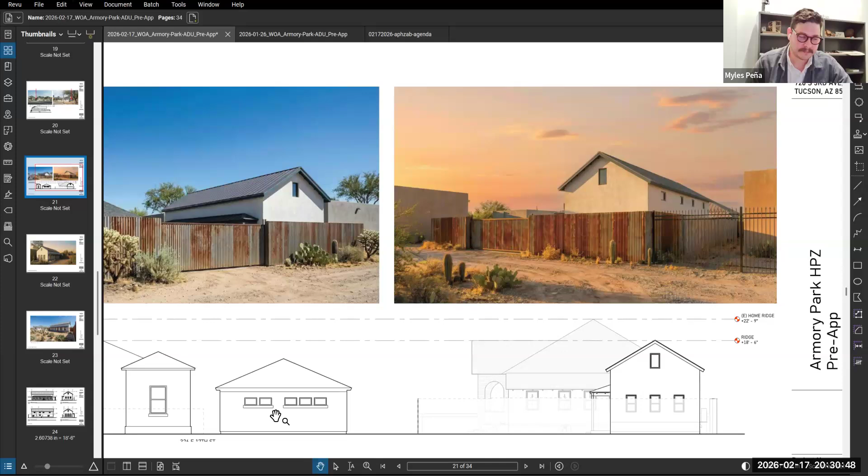That said, generally clerestory windows have been banned in Armory Park, and awning windows have been banned in Armory Park generally. However, you're in a block that clearly shows them, and on this I like the mezzanine. I'm really glad that you did a one-story building. The fixed windows in the eaves, because it mirrors the form of what is often a vented attic vent, doesn't bother me on a new building. The clerestories are okay there.

If you do an opening window in your shower, I would recommend a square form, a little bit more vertical, and an opening casement that's a vertical casement, not a horizontal one. As an adjustment, still fitting within those forms. It's over a tub shower, so you can play with that.

The other thing is, I really appreciate that the old metal fence that shows up on Google views, that was industrial grade metal fencing, has been replaced since with corrugated, which is appropriate. I did not have a tape measure, but I'm not sure of the height of that fence, but your drawing should show it has 6 feet. That's all I'm going to say about that. It is existing. Understood.

So John, I apologize because I wanted clarification about the clerestory, but Stan had been in front of you, so I wanted that hand up first. Are you comfortable if John continues? No, John, go ahead. Okay, please John, please continue.

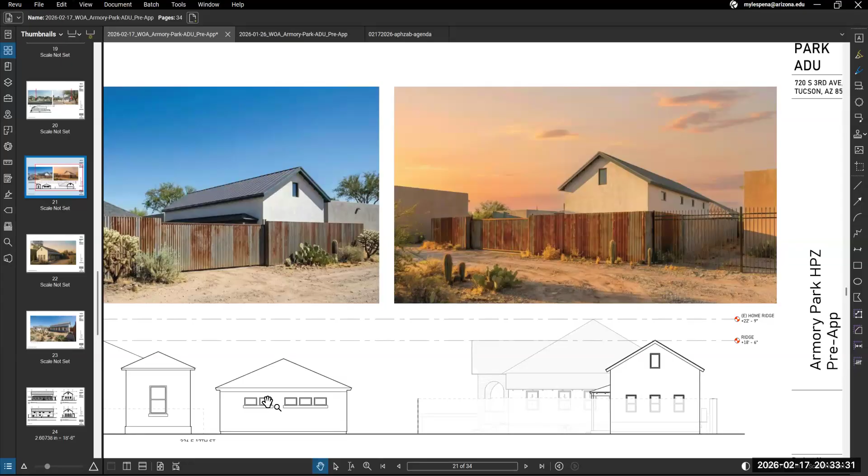But the one question I did have, a couple things I had questions on, was where's the parking on this lot? So this here is an existing gate. I understand that, but you don't indicate any parking in the interior of the lot that I'm aware of. Let's see here, let me find my site plan. Yeah, so we do have a dedicated vehicular use zone of 760 square feet here.

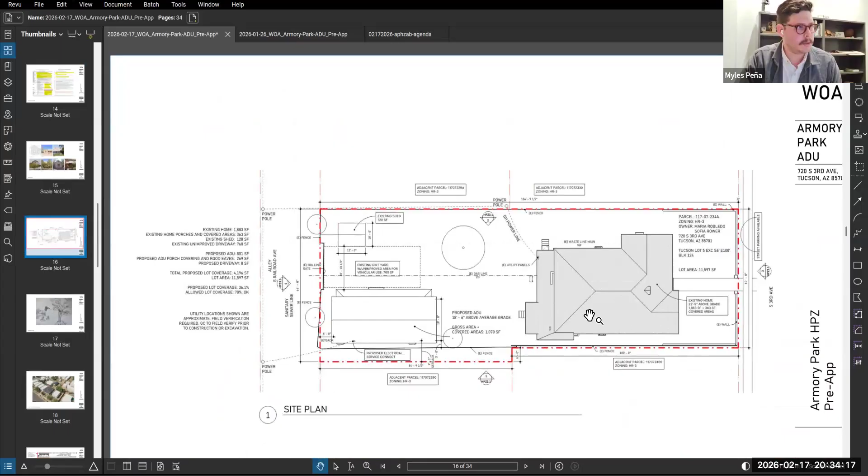Well, I guess I saw that, but I wasn't sure how you were actually parking in there. Is that what you're allowing? So you should really have, what, maybe 4 spaces, maybe 2, maybe only 2. I think technically we meet all the parking requirements with the street parking that is available, so this is kind of an extra. There's going to be 2 people living on this property with 2 vehicles, so both vehicles would fit within the street parking, I guess that's obvious. I mean, I understand that.

I guess what I would like to see, because it's a through lot going all the way to the alley, it's nice to have some parking off-site or on-site, so that we don't use—because I tell you what, I think the on-street parking is really getting to be a problem in Armory Park. Now obviously you've got enough space there. Is that their intent, to use this off-street parking more than on-street parking? Or are they intending to use on-street parking more? Sofia would be able to better answer that. Yeah, I'm happy to answer that.

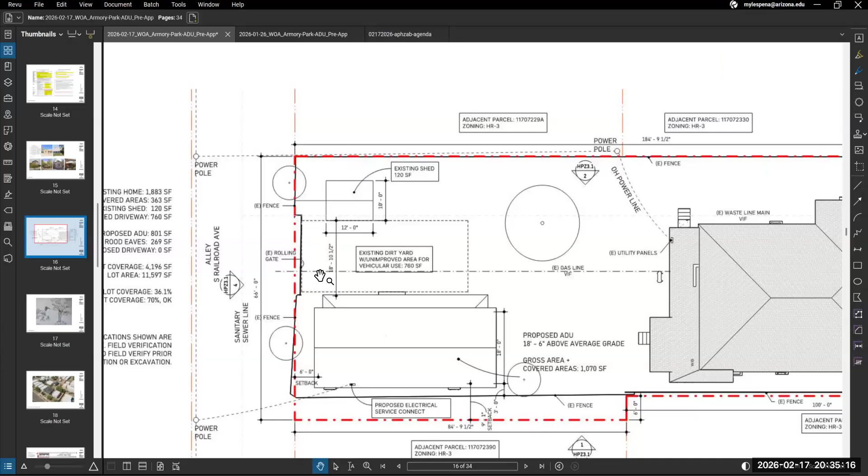Hi everyone, I'm Sofia. I bought this property almost 2 years ago, and I've spent the last year renovating the main house very extensively. I'm going to live in the main house, and my partner of many years will be living in the second house. Our plan is for that rolling door, and that space can easily accommodate two cars.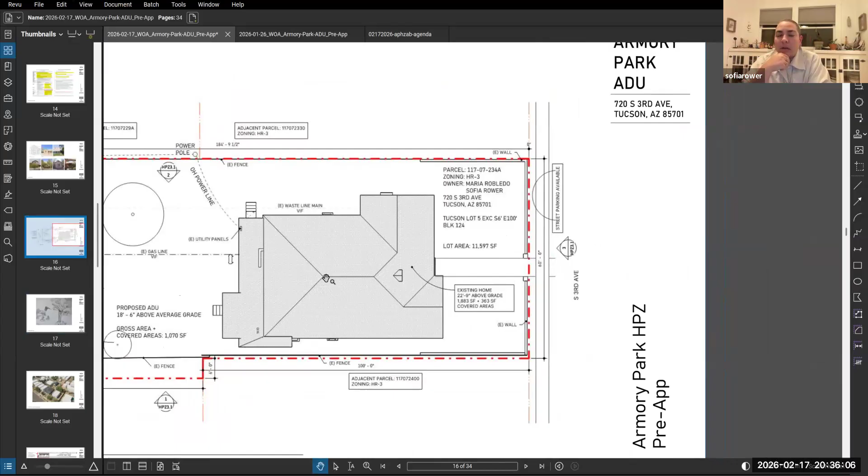Our plan is for the rolling gate to open and lead right into a parking spot. For me, where I enter from the main street, there's ample street parking. I'm on the street at all hours of the day, most days of the week. I imagine parking is an issue on many blocks, but right now on Third between 17th and 18th, it's still quite flexible. Even with a lot of construction happening on that block, it's never come close to being full. So between the two of us, there will be one parking spot with flexibility for two if we're traveling, to fit two vehicles in the back in that area Myles indicated, and also street parking in front for at least two vehicles, often more.

Okay, thank you. I'm glad to hear you're using off-street parking as much as you can. I had a bit of an issue when we went with the All Saints project, and I actually made a daily tour around the All Saints project to find out how much on-street parking is actually available. That project would have had a problem because they required 20 on-street parking spots, and they only made it about 50% of the time. So I'm seeing a lot of on-street parking happening as Armory Park continues to develop. Having said that, I'm satisfied with what's going on here.

Okay, yeah, thank you. I had it— oh, sorry, go ahead.

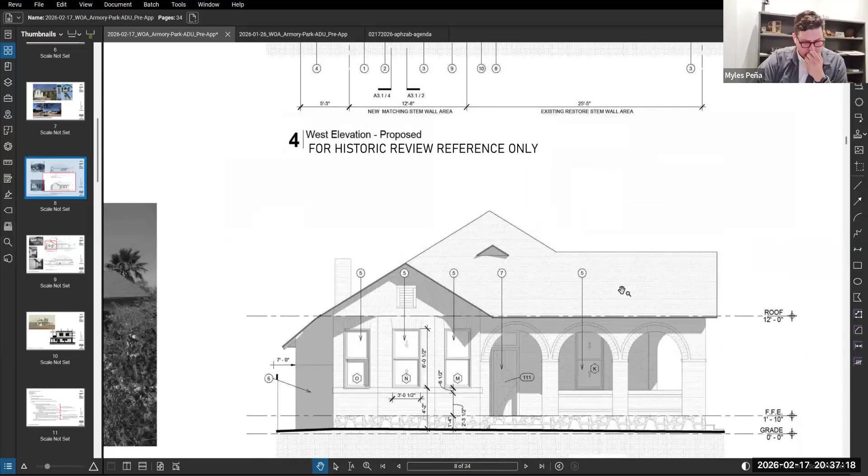Stan: on the chair, windows, what's the exterior finish, is that a paint finish? So yes, it's a paint over the Ardex smooth stucco. Okay, no, I meant the wood windows. Oh, that's a clear finish. Yes, it's a clear finish, and I worked with a master carpenter to exactly replicate the windows from 1907 on the main house, down to the exact joinery style they used in 1907. My hope is to be able to afford the same windows on the back house, which are finished with oil, clear, so you can see the grain of the wood.

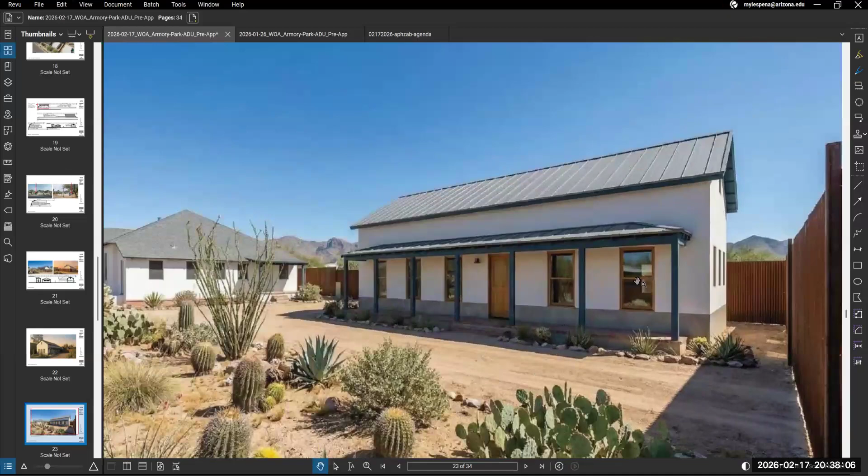And so the wood windows on the existing house are going to be a clear finish also. Yes. Okay, all right, very good.

On your metal roofing, the shingles that you have on the existing house are really quite nice. Why not match the existing house and tie those two projects together? I think from our perspective, it's a nicer, higher quality finish to have the metal roof. It's also a more durable surface. I agree, it's more durable, no question about that. I just think it ties the projects together a little better. But I don't know that we're going to have a problem with the metal roofing, I just wanted to bring that question up.

On the wainscot on the new addition, which has the Belton mineral concrete, I'm assuming that's a hard, smooth, steel-finished surface made to look like concrete. I guess that's something you don't see that type of finish on any projects around the neighborhood. I understand the comment about tying it to the rock foundation on the old house, but I'd have a bit of an objection to the hard, smooth, steel-finished surface. It's going to be flush with the stucco. I understand you don't want to extend it out, but I'm assuming you have some type of control joint between the two stuccos, right?

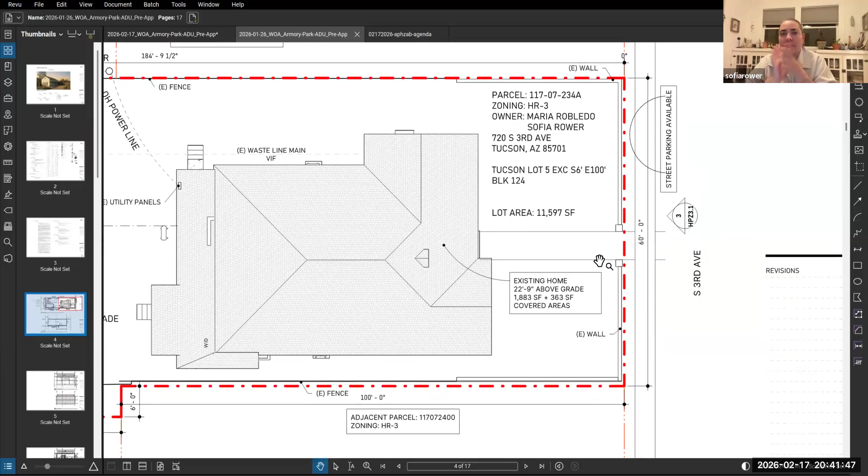Yes, that front wall was approved. Originally we asked for it to be 6 feet and we were approved at 4 feet. When funds are secured, it'll also be stuccoed to match the existing house color. I figured it would be stucco, but I've never... John, can you help me on this?

Because I saw that and thought, well, that's a violation of the code. How did we get that? Anybody? Mr. Chair, members of the board, the code allows for 4 foot in front of the house. Well, I've never, at the time I've been on the board, that was one thing we always rejected. No, the code specifically allows for 4 foot in front of the house. I've never heard that before. John, is that true? John, are you there? I think we may have lost John for a moment.

Steve, are you familiar with that? That's a surprise to me. We have usually discouraged it because of the visual opacity of it. But I am not surprised, I vaguely remember, but it's usually been discouraged.

Sorry about that. But you're telling us it wasn't approved? It was approved on a submittal, I don't remember this. It was approved as submitted, a 4 foot solid wall on the plan, and it's allowed by code. Yeah, it's allowed by code. Technical Standard Manual 9-02 allows 4 foot in the front. It goes back to Secretary of Interior standards that they can't be taller than 4 feet in front, so it has to be open above 4 feet. But yeah, you can have a front wall that's 4 feet, and it was approved, and I think it will be stucco as funds allow.

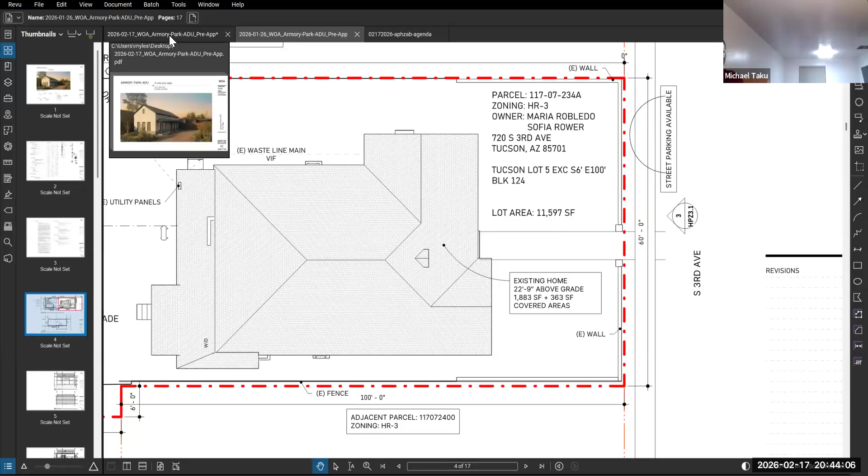Vice Chair, I want to say very strongly, 4 feet is allowed in the front. Even if people do retaining walls 2 feet and all that, it doesn't mean that 4 feet is not allowed. 4 feet is okay, allowed, fine in the front, and 6 feet is allowed on the side.

I seem to remember other presentations before us where they had a solid wall in the front yard, and it was rejected.

So, thank you. John, you still have your hand up. Oh Stan, were you finished? Yeah, I'm finished. Okay, real quick, John, I just had a question for Stan.

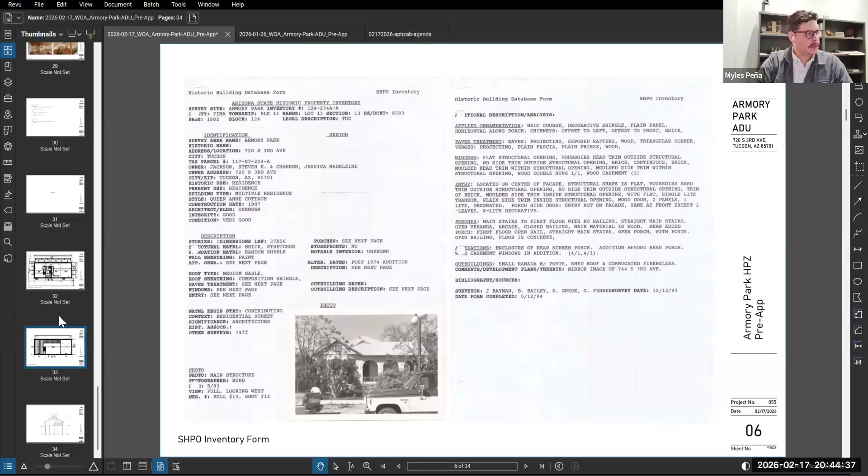Because I know you were kind of withholding some comments on window proportions or sizes. Matching the windows of the existing home just did not make sense with the scale. There are very large windows on the main house, but the overall proportion was meant to be similar, and the window size is also very generous considering the scale of the building here.

I just wanted to see, looking forward, if you had any issues with this size of window, or proportion, or matching. They are a little bit bigger windows than what was used on the current work happening here, but it's a little different condition with the tighter elevation and the lower roof.

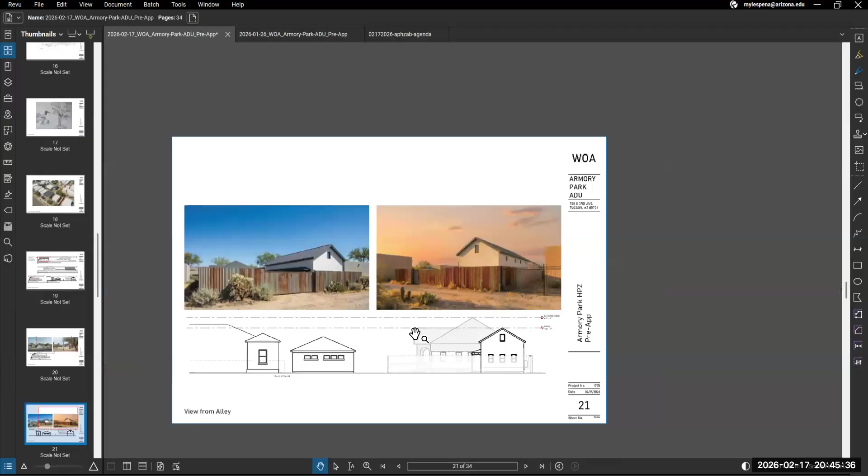No, I've got no problems with the windows at all. They actually look good. In fact, the comment that Maurice had about the clerestory windows - I don't know, something that you might be able to do, and it's just a suggestion.

I don't know if it would help or not, but a lot of the clerestory windows or openings that are up there on existing homes are vents to the attic, and they have a jalousie-type horizontal wood frame that goes across, allowing air to move behind it with a screen behind the wood jalousie.

In that horizontal orientation, you could have a window behind that, and it would simply take that clerestory window away and still allow light into the area - as an option. I'm not saying that's something you should do, but if there are objections to the clerestory window, that might be one way to handle it.

Yeah, I think we had started going down that road, taking some inspiration from the Rob Paulus homes on 18th, where they do the much larger opening window with a slat sort of across it. But we ended up - it was intentional that the proportions and location matched with the vents - though for the smaller opening that might pose a challenge. But I do appreciate that sentiment and understand.

Okay, John, you still have your hand up. Yeah, I've got a couple comments. For Rob Paulus's house, just so you know, they were built-

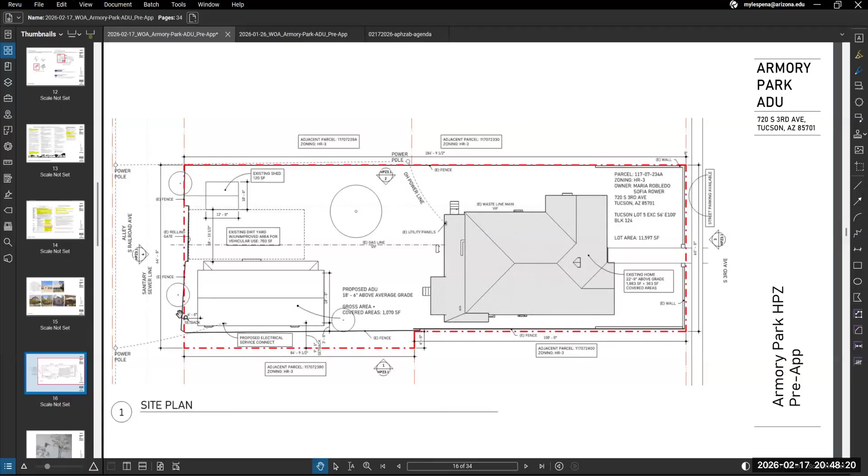Understood. So I'm curious - there's been a couple of comments on parking, but as far as I'm aware, the two spots provided off-street here are adequate. So is there any additional recommendation on that?

I would just put in a line that says dedicated off-street parking for the ADU unit. Gotcha, okay.

And then yeah, straightening out the fence. I think that's clear - this was kind of from measurements, but I'll revisit that. And then what was your last comment?

Oh, landscaping. I don't believe there's a landscaping review required for this scale of project, correct? I don't think so. I can't remember if they're now interpreting it that you're supposed to plant a tree with an ADU - I know you are if it's a duplex.

Okay, I'll look into that a little bit more. And there's a new bill in the House tomorrow that they're voting on at 8 a.m. that could change all of this again. So it's kind of tweakish.

But if you could modify the shower window a little bit, it would probably be an easier sell - with the allowance that it would be approved for this specific site, this specific location, with this design being appropriate, rather than language that says you can do it now anywhere, for clerestories.

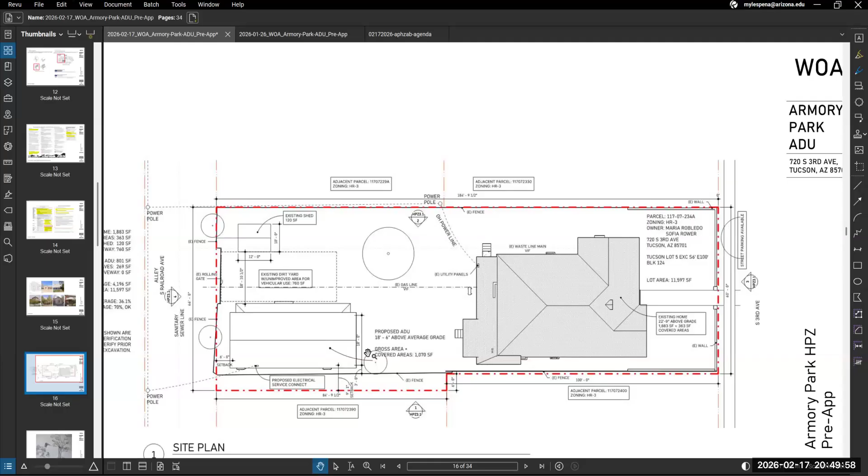Sure. No, yeah, that makes sense.

Mr. Chair, members of the board, for this type of project, landscaping is really not a requirement. If they choose to provide landscaping, fine and nice, which I think they have some already, but the code says landscaping is reviewed as part of bigger projects. I consider this a small project.

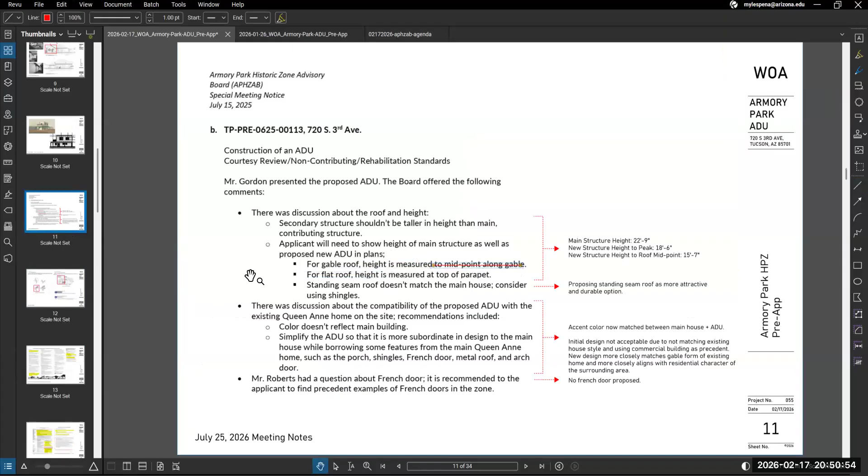One other correction: on the meeting minutes from last summer, we corrected those. Height in HPZ for a principal building is total height, not mid-ridge height on a gable. We've used that for accessory structures in the past, on a case by case basis, but height in HPZ is defined as total height, period.

Okay, makes sense. On 6.4.4, section B, the HPZ overrides section A. But I think either way it's not an issue on this project. I appreciate that.

Excellent. Have we had an opportunity to provide sufficient feedback?

Just a quick comment - it's not an alley, it's a minor avenue. I'd be haunted by a ghost from the recent past if I let that one go. Railroad is considered a small avenue, a minor avenue, not an alley. But I'm liking the project, and I'm glad I missed the first part of it. My apologies to Railroad Avenue.

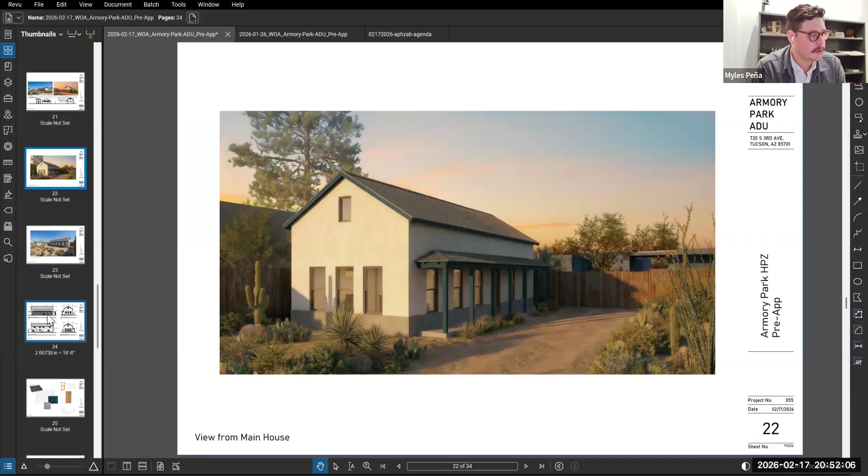So for clarity, overall direction is looking good. Windows are looking good. We can make some adjustments to the shower window. The roof material sounds like we can propose this, and that would be an easy amendment if it was turned down. Some clarity is needed on the detail of what's happening at the stucco transition. The biggest issue at the moment is whether these windows are going to be allowed, and it sounds like consensus is mixed but maybe favorable. So that would be contingent - if these were voted down, the contingency would be to eliminate windows, which would be a shame.

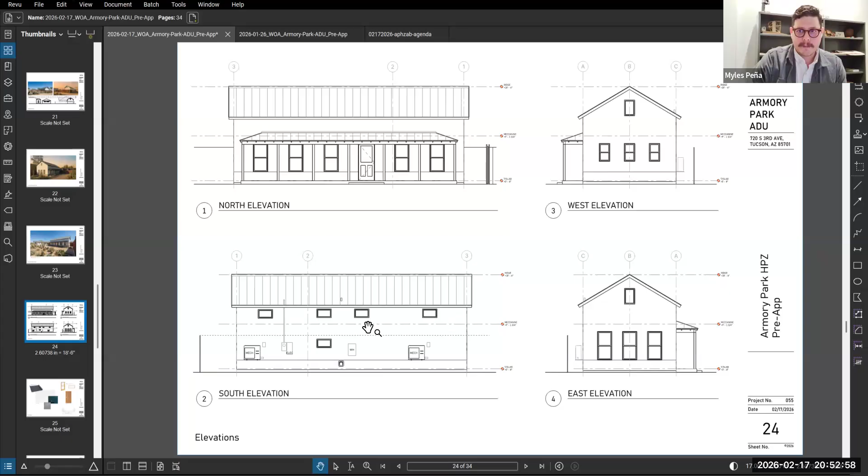You've got a precedent, whether intended or not, on the minor avenue. For a new dwelling unit, it can have a slightly different type of roof. But at the same time, you don't have the history of an existing 6-foot-tall fence that suddenly came down, so just keep that in mind. Stan was very helpful in mentioning those window coverings, which would resolve your issue with heat coming from the south side, should you decide to get more traditional windows on the south side.

Thank you. Lynn, were you going to say something? No, I'm good, thank you. Okay, so I'm hoping we can move on so we can maybe finish before 9 o'clock. Thank you both so much for coming in and for the excellent presentation. Yes, thank you so much. Yeah, it was a nice presentation.